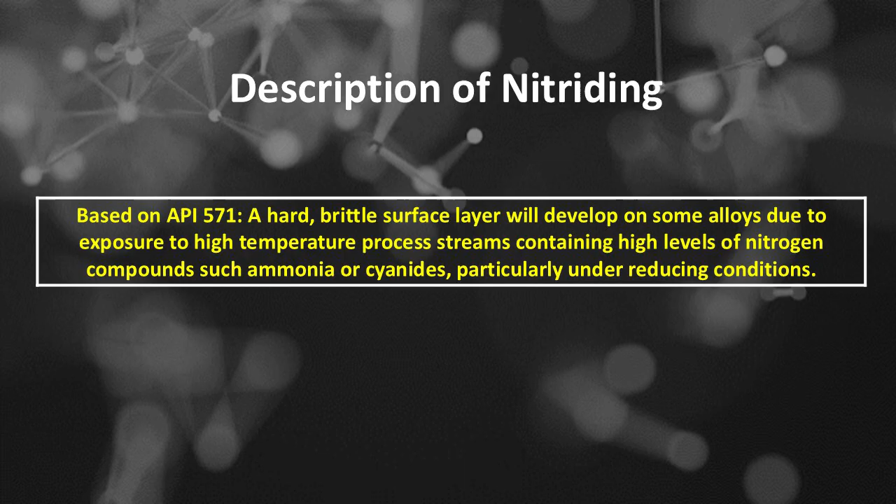Welcome. Today we'll present about nitriding damage mechanisms as part of high-temperature corrosion greater than 400 degrees Fahrenheit or 204 degrees Celsius. Description of nitriding damage mechanisms based on API 571: a hard, brittle surface layer will develop on some alloys due to exposure to high-temperature process streams containing high levels of nitrogen compounds such as ammonia or cyanides, particularly under reducing conditions. Here's a detailed description of nitriding damage.

Introduction: Nitriding is a surface hardening process used to improve the wear resistance, fatigue strength, and corrosion resistance of ferrous metals, particularly steels and alloys. It involves diffusing nitrogen into the surface layer at elevated temperatures to form nitrides, creating a hard, wear-resistant surface. However, despite its benefits, nitriding can sometimes lead to damage if not properly controlled or if adverse conditions occur. Understanding nitriding damage is essential to prevent component failure and ensure optimal performance. Here's a detailed description of nitriding damage.

Number 1 is nature of nitriding process. Process parameters: typically conducted at temperatures between 500 degrees Celsius and 550 degrees Celsius, or 932 degrees Fahrenheit and 1022 degrees Fahrenheit. Material reactions: nitrogen reacts with alloying elements such as chromium, aluminum, molybdenum, and vanadium to form nitrides. Surface characteristics: results in a hard, dense, and often brittle nitride layer on the surface while maintaining a tough core.

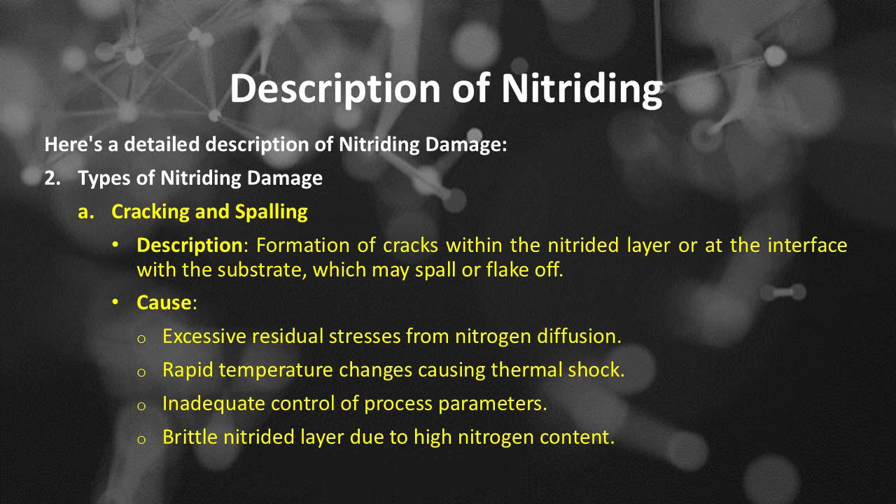Number 2 is types of nitriding damage, includes: A, cracking and spalling, described as formation of cracks within the nitride layer or at the interface with the substrate, which may spall or flake off. Cause of cracking and spalling includes: excessive residual stresses from nitrogen diffusion, rapid temperature changes causing thermal shock, inadequate control of process parameters, and brittle nitride layer due to high nitrogen content.

Types of nitriding damage. Number B, blistering, described as formation of blisters or bubbles on the surface, often accompanied by flaking. Cause of blistering includes: trapped gases or impurities beneath the nitride layer, excessive nitrogen concentration leading to internal stresses, surface contamination or oxide layers interfering with uniform diffusion.

Types of nitriding damage. Number C, porosity and pitting, described as development of pores or pits within the nitride layer. Cause of porosity and pitting includes: improper cleaning or contamination before nitriding, excessive diffusion leading to microvoids, hydrogen entrapment during processing.

Types of nitriding damage. Number D, decarburization and loss of toughness, described as reduction of carbon content near the surface, weakening the material. Cause of decarburization and loss of toughness includes: high-temperature nitriding causing decarburization, overexposure, or prolonged nitriding cycles.

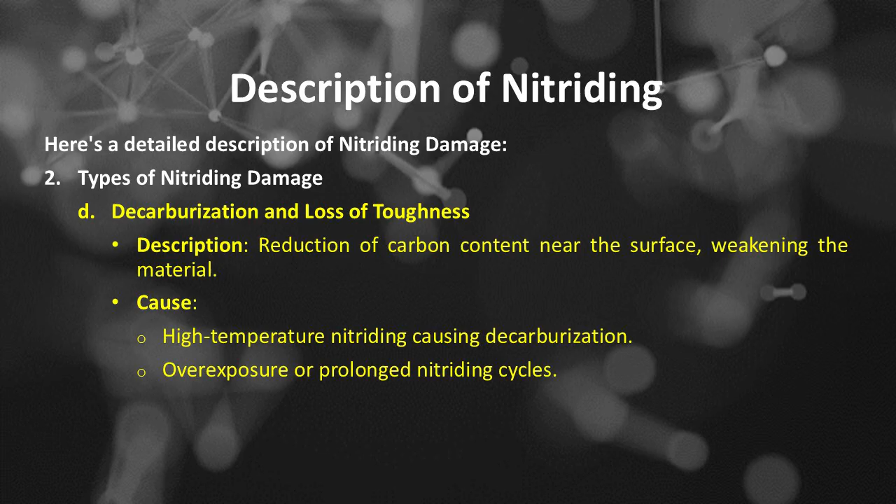Types of nitriding damage. Number E, distortion and dimensional changes, described as warping or dimensional inaccuracies due to differential expansion or contraction. Cause of distortion and dimensional changes includes: uneven heating or cooling, high residual stresses from nitriding.

Number 3 of detailed description of nitriding damage is mechanisms leading to nitriding damage, includes: residual stress accumulation, the nitrogen diffuses into the surface, creating tensile residual stresses that can exceed the material's strength; thermal stresses, rapid heating or cooling induces thermal stresses, causing cracking; chemical incompatibility, inappropriate alloy composition or impurities can lead to uneven nitriding or phase formation; process control failures, deviations in temperature, time, or atmosphere can produce non-uniform layers and damage.

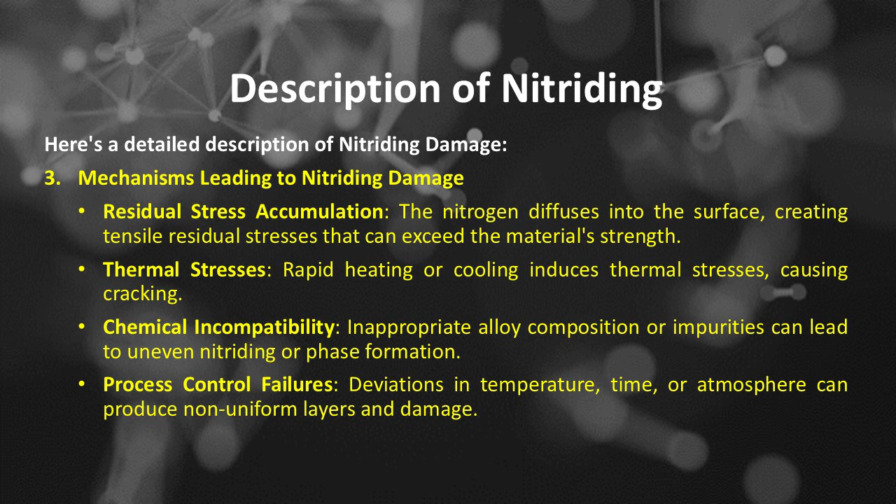Description of nitriding damage. Number 4 is common manifestations and symptoms: cracks visible on the surface or within the nitride layer, flaking or spalling of the nitride surface during operation, surface blisters or bubbles observed visually, increase in surface roughness or pitting, dimensional inaccuracies or warping.

Nitriding damage manifests mainly as cracking, blistering, porosity, and surface spalling caused by residual stresses, thermal shocks, or improper process control. Proper material selection, precise process control, and thorough inspection are essential to prevent and detect nitriding-related failures.

Nitriding damage affected materials based on API 571: Number A, carbon steels, low alloy steels, 300 series SS and 400 series SS. Number B, nickel-base alloys are more resistant.

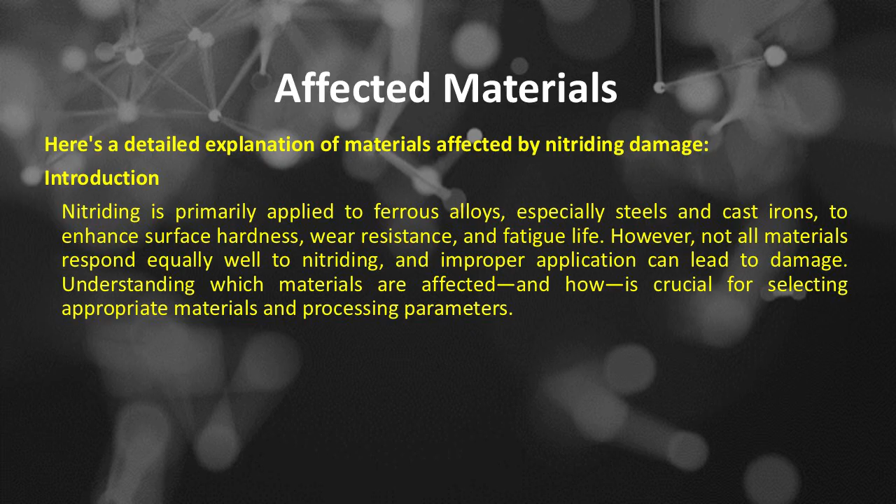Here's a detailed explanation of materials affected by nitriding damage. Nitriding is primarily applied to ferrous alloys, especially steels and cast irons, to enhance surface hardness, wear resistance, and fatigue life. However, not all materials respond equally well to nitriding, and improper application can lead to damage. Understanding which materials are affected, and how, is crucial for selecting appropriate materials and processing parameters. Here's a detailed explanation of the materials affected by nitriding damage.

Number 1 is primary materials susceptible to nitriding damage, includes: A, steels, carbon steels and alloy steels. Commonly nitrided materials include: low to medium carbon steels, such as 1018, 1045; alloy steels, such as 4140, 4340, 9310, and other steels containing alloying elements such as Cr, Mo, V, Ni; hardenable steels, those designed for heat treatment, which often respond well to nitriding.

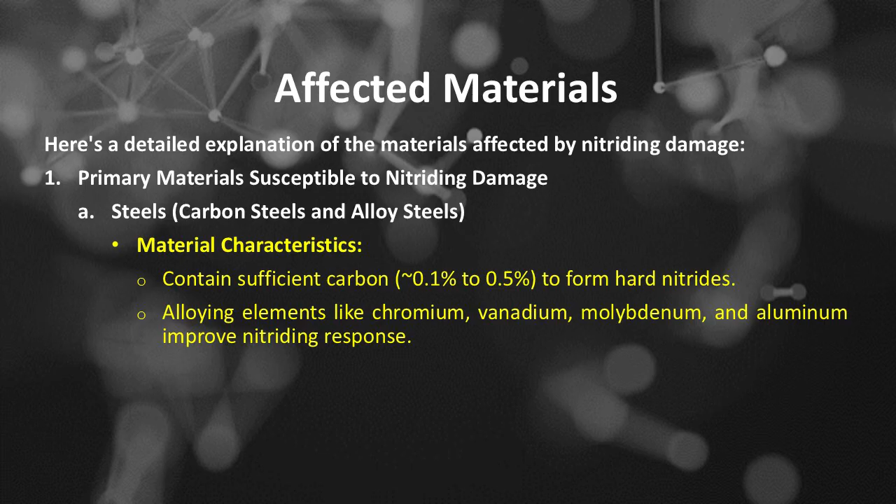Material characteristics include: contain sufficient carbon, approximately 0.1% to 0.5%, required to form hard nitrides; alloying elements like chromium, vanadium, molybdenum, and aluminum improve nitriding response.

Damage susceptibility includes cracking due to residual stresses if process parameters are not optimized, decarburization leading to surface softening, and formation of brittle nitrides if overexposed.

The next primary material susceptible to nitriding damage is cast irons. Types include gray cast iron and ductile or nodular cast iron. They can be nitrided but are more prone to cracking due to their inherent brittleness. Damage includes surface cracking, spalling, or distortion.

Another primary material susceptible to nitriding damage is stainless steels. Common grades include 304, 316, or austenitic stainless steels, and some martensitic stainless steels such as 410, 420.

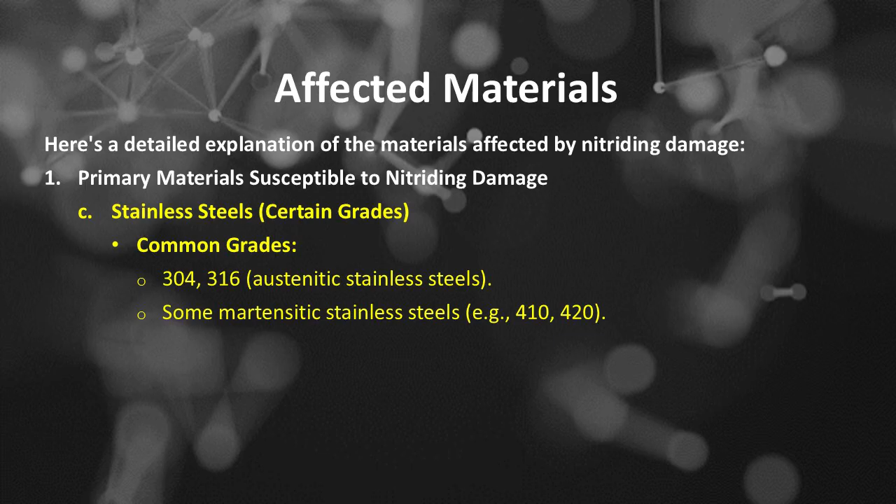Considerations: nitriding of stainless steels is more complex due to their corrosion resistance mechanisms. Damage can occur if nitriding conditions cause phase transformations, such as formation of chromium nitrides that deplete chromium from the matrix, leading to sensitization and corrosion susceptibility.

Number 2 of the materials affected by nitriding damage is materials less suitable or sensitive to nitriding damage. Number A, high carbon steels with excessive carbon. Excess carbon can lead to embrittlement or distortion during nitriding, and overly high carbon content increases risk of cracking.

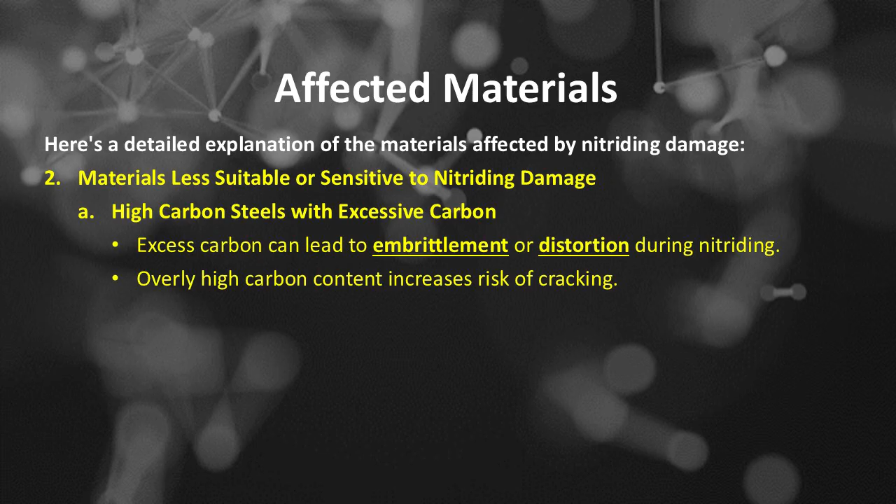Number B, nonmetallic or poorly nitridable materials. Examples include aluminum alloys, titanium, copper and its alloys, and non-ferrous metals. These materials do not form nitrides easily and can be damaged if subjected to high-temperature nitriding atmospheres intended for steels. Number C, certain cast alloys.

Some cast materials with high porosity or impurities are more prone to blistering, porosity, or cracking during nitriding.

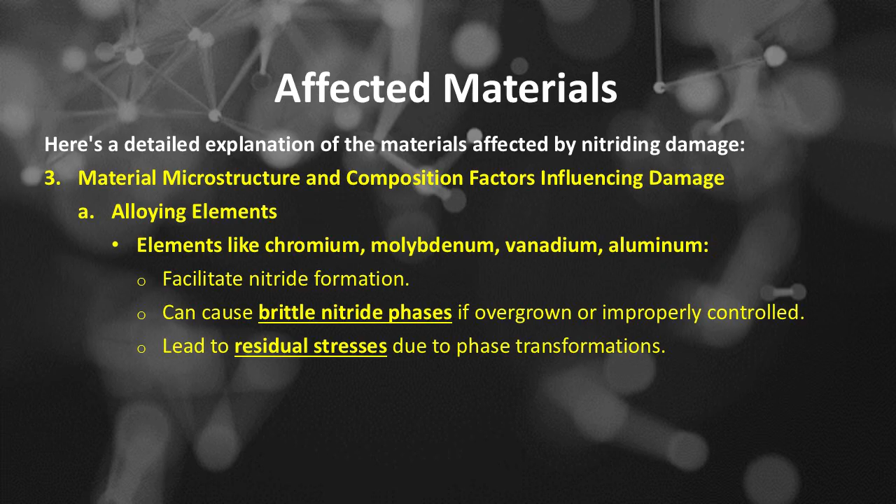Number 3 of the materials affected by nitriding damage is material microstructure and composition factors influencing damage. Number A, alloying elements like chromium, molybdenum, vanadium, and aluminum facilitate nitride formation, can cause brittle nitride phases if overgrown or improperly controlled, and lead to residual stresses due to phase transformations.

Number B, carbon content affects the formation of carbides and nitrides. High carbon can cause decarburization or carbide/nitride segregation leading to embrittlement.

Number C, initial microstructure, including ferritic, martensitic, or bainitic steels, responds differently. Martensitic steels tend to develop high residual stresses and cracks if nitriding is too aggressive. Ferritic steels can nitridize more uniformly but are still susceptible to cracking if process parameters are not optimized.

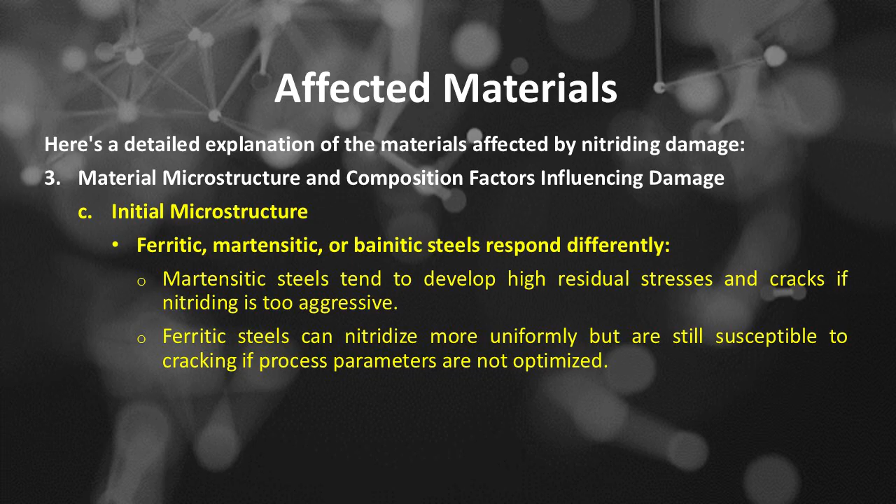Number 4 of the materials affected by nitriding damage is material damage mechanisms related to composition, including residual stresses. Alloys with certain compositions can develop high internal stresses during nitriding, leading to cracking and phase transformation. Certain compositions may undergo unwanted phase changes such as formation of brittle nitrides or carbides, causing embrittlement.

Decarburization: materials with high carbon content can lose carbon from the surface under nitriding conditions, weakening the surface layer.

Number 5 of the materials affected by nitriding damage is special considerations for non-standard materials, including composite materials. Nitriding can cause damage due to differential thermal expansion or phase incompatibilities. For coated materials, protective coatings may be damaged or delaminate during nitriding.

Summary table of the materials affected by nitriding damage. If material type is low to medium carbon steels, then the common issues during nitriding will be cracking, decarburization, distortion, and the susceptibility to damage will be high if process not controlled.

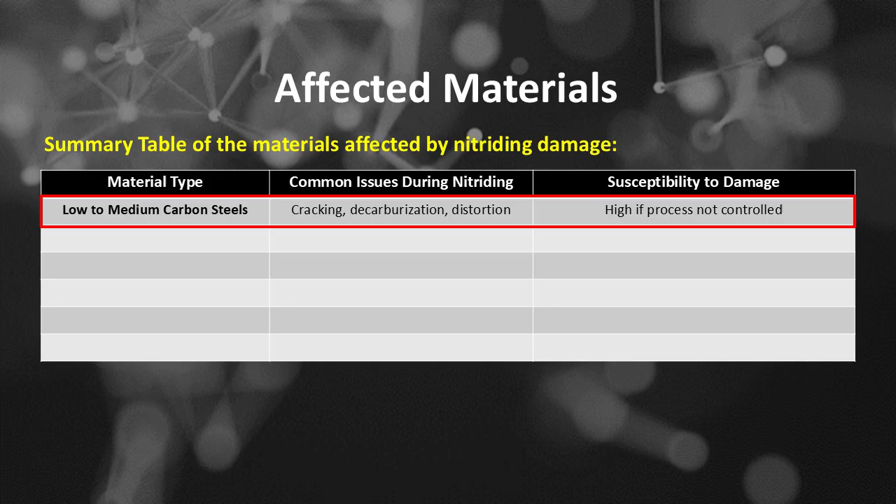If material type is alloy steels, then the common issues during nitriding will be residual stress buildup and brittle phases, and the susceptibility to damage will be medium to high depending on alloy and process.

If material type is cast irons, then the common issues during nitriding will be cracking, spalling, distortion, and the susceptibility to damage will be high due to brittleness.

If material type is stainless steels, then the common issues during nitriding will be phase changes, sensitization, cracking, and the susceptibility to damage will be medium, sensitive to heat treatment conditions.

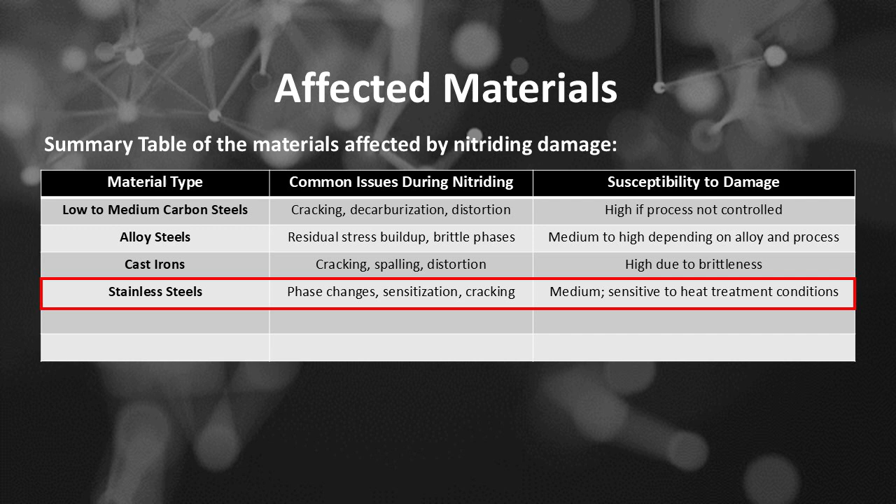If material type is high carbon steels, then the common issues during nitriding will be embrittlement and cracking, and the susceptibility to damage will be high if overexposed.

If material type is non-ferrous metals, then the common issues during nitriding will be no nitriding response, damage unlikely, and the susceptibility to damage will be not applicable.

The susceptibility of materials to nitriding damage depends heavily on their composition, microstructure, and the nitriding process parameters. Proper material selection, process optimization, and pre- and post-treatment procedures are vital to mitigate damage and ensure expected material performance.

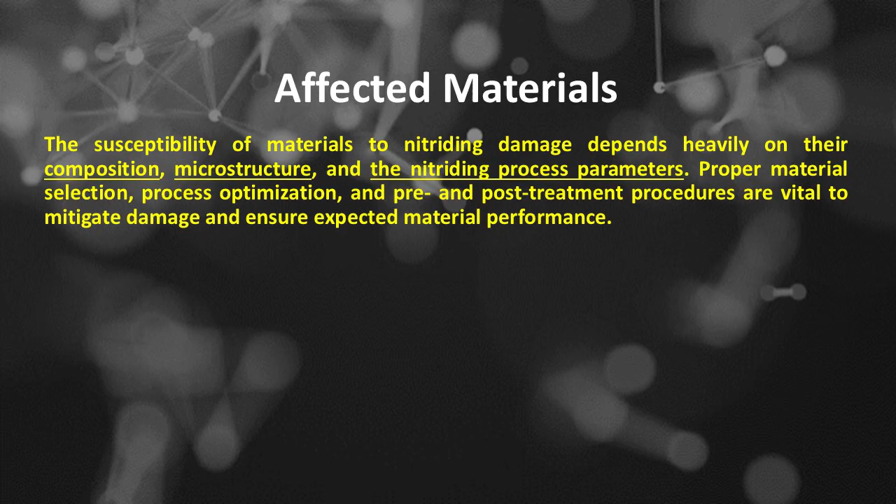Nitriding damage critical factors based on API 571. Number A, nitriding is a diffusion-controlled process dependent on temperature, time, partial pressure of nitrogen, and metal composition.

Number B, temperatures must be high enough to allow for the thermal breakdown or dissociation of nitrogen from ammonia or other compounds and for diffusion of nitrogen into the metal.

Number C, nitriding begins above 600 degrees Fahrenheit or 316 degrees Celsius and becomes severe above 900 degrees Fahrenheit or 482 degrees Celsius. Number D, high gas phase nitrogen activity, or high partial pressures of nitrogen, promotes nitriding.

Corrosion resistance may be adversely affected by nitriding. Alloys containing 30% to 80% nickel are more resistant. A loss of high temperature creep strength, ambient temperature mechanical properties—specifically toughness, ductility—weldability, and corrosion resistance may result.

Here's a comprehensive, detailed explanation of the critical factors of nitriding damage. Introduction: nitriding is a thermochemical surface treatment designed to enhance surface hardness and wear resistance. While beneficial, nitriding can sometimes lead to damage such as cracking, spalling, blistering, or distortion. These adverse outcomes are often the result of key factors that influence the process's success or failure. Understanding these critical factors allows engineers and technicians to optimize nitriding conditions, select appropriate materials, and implement proper pre- and post-treatment procedures to minimize damage.

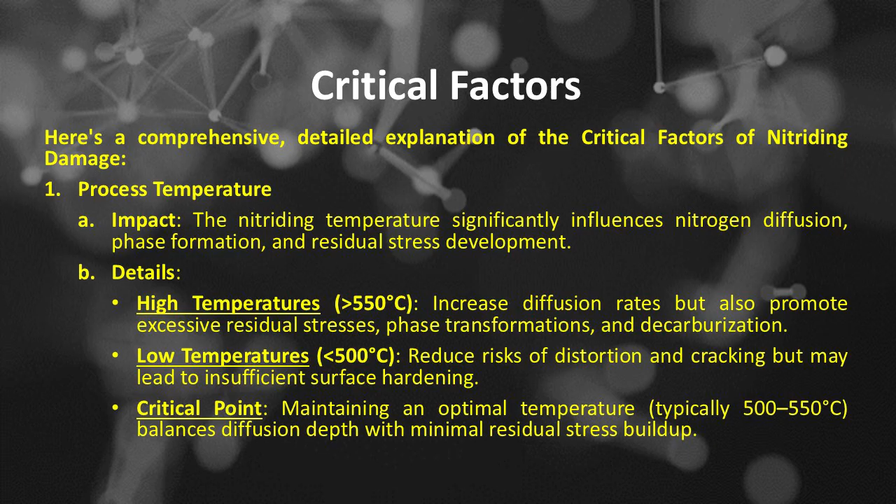Number 2 of the critical factors of nitriding damage is nitriding duration. The impact is the length of the process influences the nitride layer's thickness and the accumulation of residual stresses. Details: overlong nitriding causes excessive nitrogen diffusion, leading to high internal stresses, brittleness, and potential cracking. Insufficient nitriding results in inadequate surface hardening and vulnerability to wear. Critical point: precise control of process duration ensures a balanced nitride layer with minimal damage risk.

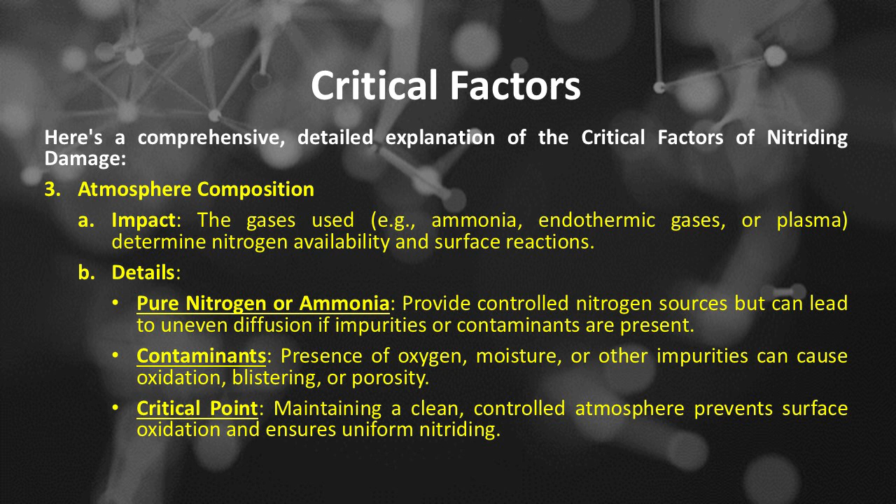Number 3 of the critical factors of nitriding damage is atmosphere composition. The impact is the gases used, such as ammonia, endothermic gases, or plasma, determine nitrogen availability and surface reactions. Details: pure nitrogen or ammonia provide controlled nitrogen sources but can lead to uneven diffusion if impurities or contaminants are present. Contaminants: presence of oxygen, moisture, or other impurities can cause oxidation, blistering, or porosity. Critical point: maintaining a clean, controlled atmosphere prevents surface oxidation and ensures uniform nitriding.

Number 4 of the critical factors of nitriding damage is temperature uniformity. The impact is uneven heating causes thermal gradients that induce thermal stresses. The details include hot spots or cold zones, which lead to differential expansion or contraction, resulting in cracking or distortion. Critical point: uniform temperature distribution within the furnace and on the component surface is essential to prevent localized stresses.

Number 5 of the critical factors of nitriding damage is material composition and microstructure. The impact is the alloy's chemical makeup and initial microstructure influence its response to nitriding. Details: alloying elements like Cr, V, Mo, Al enhance nitriding but can also promote brittle phase formation if not controlled. Carbon content: excessive carbon can lead to decarburization or carbide precipitation, causing embrittlement. Microstructure: martensitic, ferritic, or bainitic structures respond differently. Martensitic steels are more prone to cracking under residual stresses. Critical point: selecting suitable alloys and microstructures minimizes damage potential.

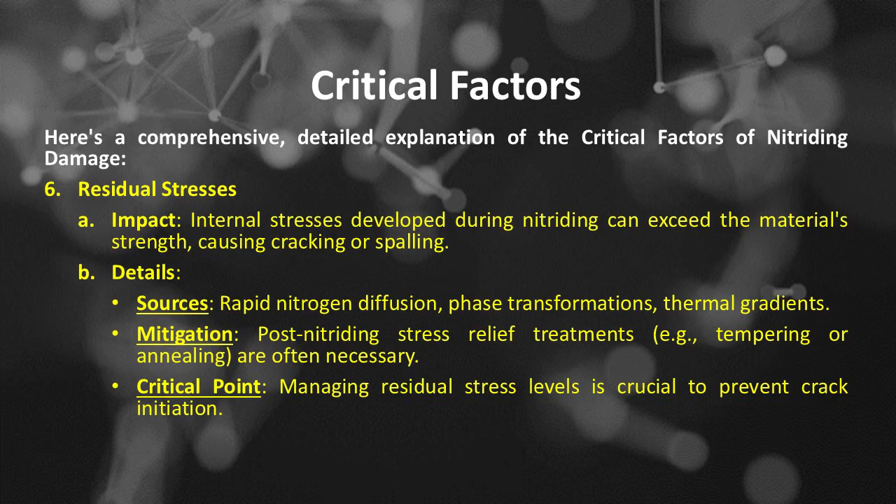Number 6 of the critical factors of nitriding damage is residual stresses. The impact is internal stresses developed during nitriding can exceed the material's strength, causing cracking or spalling. Details: sources include rapid nitrogen diffusion, phase transformations, and thermal gradients. Mitigation: post-nitriding stress relief treatments, such as tempering or annealing, are often necessary. Critical point: managing residual stress levels is crucial to prevent crack initiation.

Number 7 of the critical factors of nitriding damage is surface preparation. The impact is surface cleanliness and roughness influence nitriding uniformity and defect formation. Details: contaminants like oil, dirt, oxides, or scale can cause blistering, porosity, or uneven diffusion. Surface finish: rough surfaces may trap gases or impurities, leading to blistering or pitting. Critical point: proper cleaning, degreasing, and surface finish improve process outcomes.

Number 8 of the critical factors of nitriding damage is cooling rate and thermal shock. The impact is rapid cooling can induce thermal stresses, leading to cracking. Details: rapid cooling causes differential contraction, especially in thick or complex parts. Gradual cooling helps to relax residual stresses and prevent damage. Critical point: controlled, gradual cooling reduces thermal shock risks.

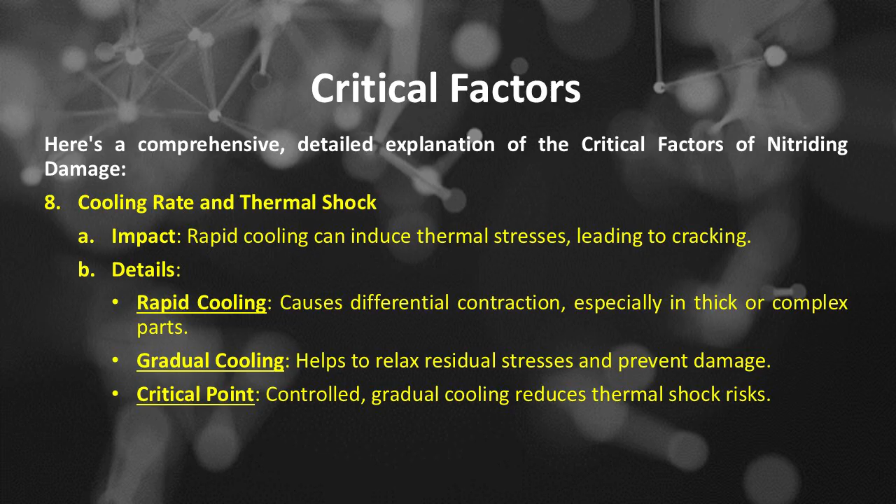Number 9 of the critical factors of nitriding damage is component design and geometry. The impact is sharp corners, thin sections, or complex geometries concentrate stresses. Details: stress concentrators like sharp edges or abrupt cross-sectional changes increase risk of cracking. Design considerations: incorporate fillets, uniform thickness, and stress relief features. Critical point: proper component design minimizes stress concentrations during nitriding.

Number 10 of the critical factors of nitriding damage is post-treatment processes. The impact is post-nitriding heat treatments can relieve residual stresses and reduce damage. Details: stress relief annealing reduces internal stresses that could cause cracking.

Renitriding is sometimes necessary if initial nitriding causes microstructural issues. The critical point is that appropriate post-treatment ensures the component's integrity and performance.

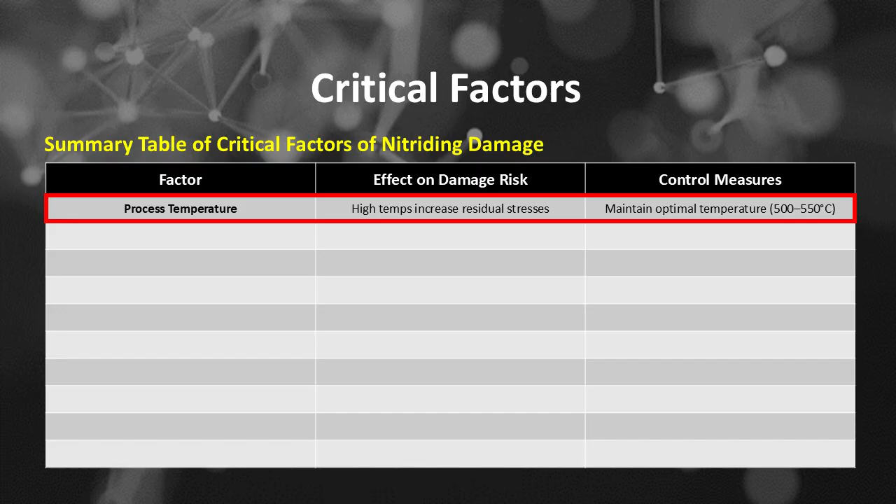Summary table of critical factors of nitriding damage. If the critical factor is process temperature, the effect on damage risk is that high temperatures increase residual stresses. Control measures should maintain optimal temperature between 500 and 550 degrees Celsius.

If the critical factor is nitriding duration, excessive time causes brittleness; control measures require precise timing control. If the critical factor is atmosphere composition, impurities cause blistering; control measures should use clean, controlled atmospheres.

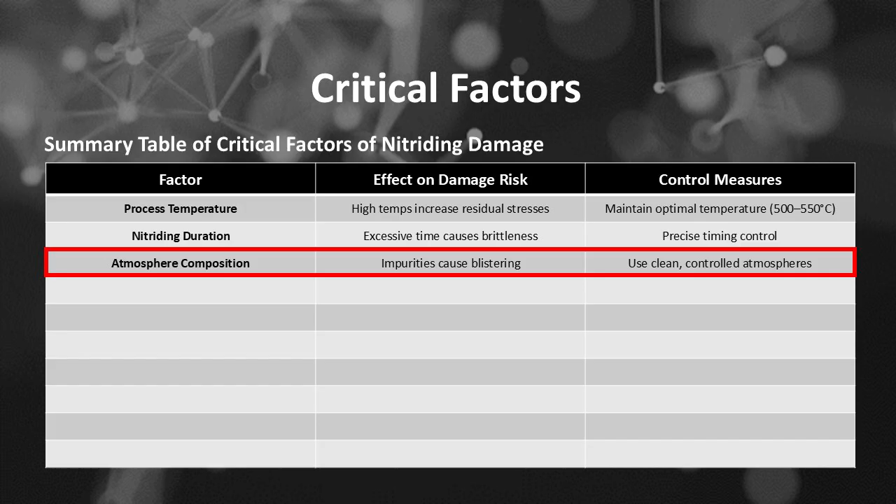If the critical factor is temperature uniformity, uneven heating causes stresses; control measures should ensure uniform furnace heating. If the critical factor is material microstructure, inappropriate microstructure leads to cracking; control measures should select suitable alloys and microstructures.

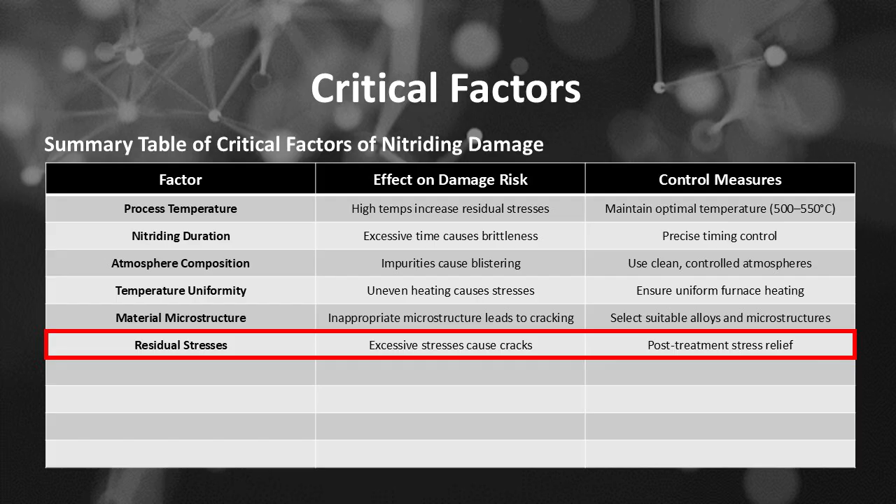If the critical factor is residual stresses, excessive stresses cause cracks; control measures should include post-treatment stress relief. If the critical factor is surface preparation, contaminants induce defects; control measures should clean thoroughly before nitriding.

If the critical factor is cooling rate, rapid cooling causes thermal shock; control measures should cool gradually and uniformly. If the critical factor is component design, sharp corners increase stress; control measures should design with stress relief features.

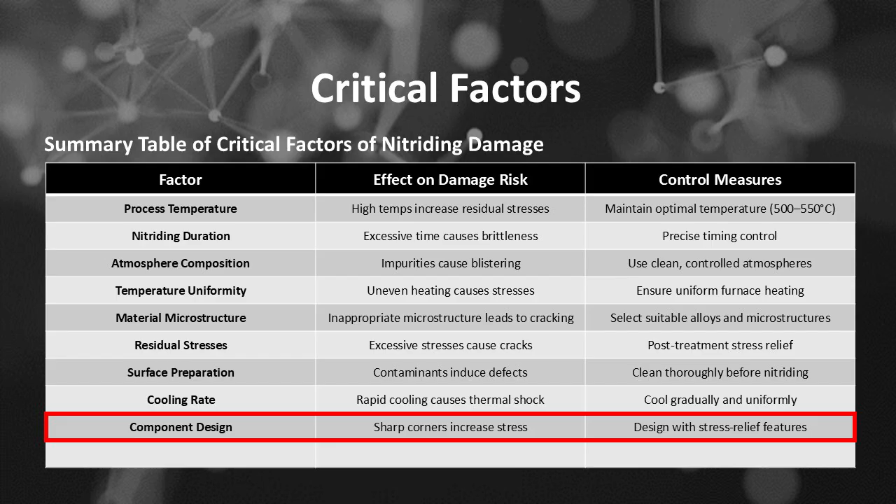If the critical factor is post-treatment processes, insufficient stress relief is a risk; control measures should implement proper post-heat treatments.

Mitigating nitriding damage requires a holistic approach, carefully managing all these critical factors. Proper process control, material selection, component design, and post-treatment are essential for achieving the desired surface properties while avoiding damage.

Nitriding damage affected units or equipment based on API 571. Nitriding can occur at any location where appropriate environment and temperature conditions are met, but it is considered fairly rare. Nitriding has been observed in steam methane reformers, steam gas cracking, olefin plants, and ammonia synthesis plants.

Here's a detailed explanation of the affected units or equipment of nitriding damage. Introduction: nitriding is a high-temperature surface treatment process that involves specialized equipment such as furnaces, gas generators, and auxiliary systems.

Damage during nitriding not only affects the workpieces but can also significantly impact the equipment used, leading to operational downtime, increased maintenance costs, and safety hazards. Understanding which units or equipment are susceptible to damage during nitriding helps in planning, maintenance, and process control. Here's a detailed explanation of the affected units or equipment of nitriding damage.

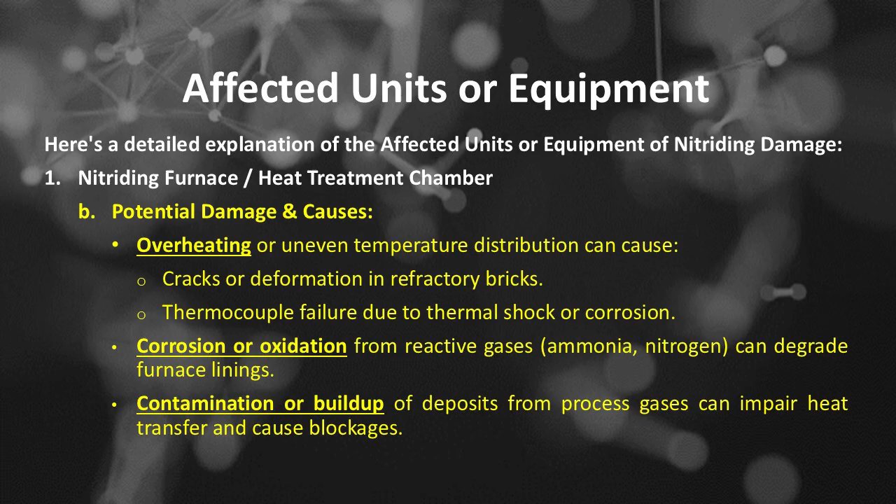The impact on the nitriding furnace or heat treatment chamber is that furnace damage leads to operational downtime, costly repairs, and the need for replacement of critical components.

Number 2, gas supply and control systems. The key components affected are gas regulators, valves, burners, and flow controllers. Potential damage and causes include corrosion or erosion from reactive gases like ammonia, blockages or leaks caused by deposits or improper maintenance, and pressure surges or fluctuations damaging control equipment. The impact of gas supply and control systems is disruption of the nitriding atmosphere, leading to inconsistent or defective treatments.

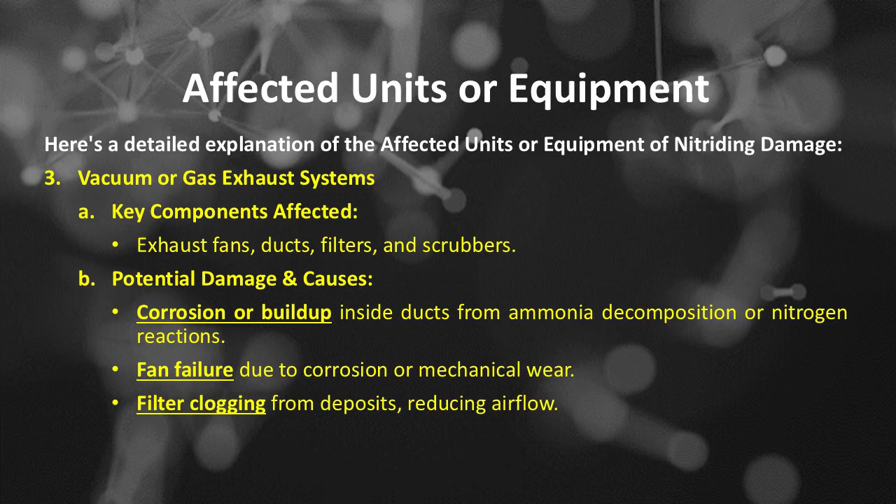Number 3 of the affected units or equipment of nitriding damage is vacuum or gas exhaust systems. The key components affected include exhaust fans, ducts, filters, and scrubbers. Potential damage and causes include corrosion or buildup inside ducts from ammonia decomposition or nitrogen reactions, fan failure due to corrosion or mechanical wear, and filter clogging from deposits, reducing airflow. The impact of vacuum or gas exhaust systems is that poor exhaust management can cause safety hazards, environmental issues, or process failures.

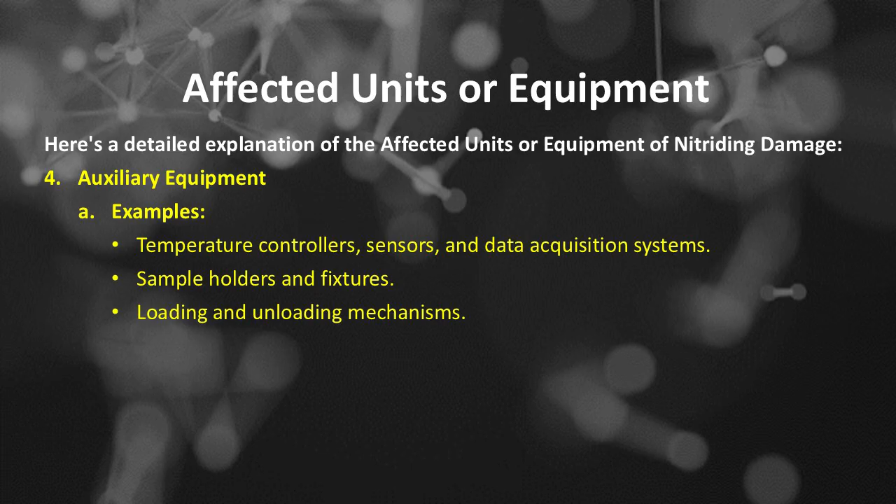Number 4 of the affected units or equipment of nitriding damage is auxiliary equipment, such as temperature controllers, sensors, data acquisition systems, sample holders and fixtures, and loading and unloading mechanisms. Potential damage and causes include sensor drift or failure from high temperatures or reactive gases, mechanical wear or deformation of fixtures under thermal stress, and contamination or corrosion affecting equipment longevity.

Number 5 of the affected units or equipment of nitriding damage is post-treatment equipment, if applicable. For examples, cooling chambers, stress relief ovens, or tempering furnaces. Potential damage and causes of post-treatment equipment includes thermal fatigue or distortion due to rapid cooling, equipment corrosion from residual gases or moisture.

Number 6 of the affected units or equipment of nitriding damage is handling and transportation equipment. For examples, carts, racks, or fixtures used to load or unload parts. Potential damage and causes includes corrosion or degradation from exposure to nitriding atmospheres, mechanical wear from repeated handling under high temperatures.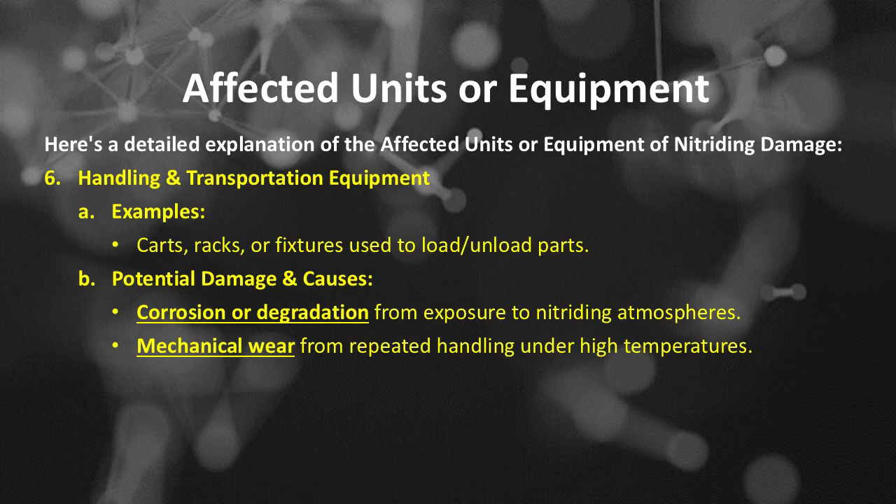Number 7 of the affected units or equipment of nitriding damage is environmental control systems. For examples, ventilation, fume extraction, and safety systems. Potential damage and causes: fume buildup due to leaks or system failures, corrosion of ventilation ducts from reactive gases.

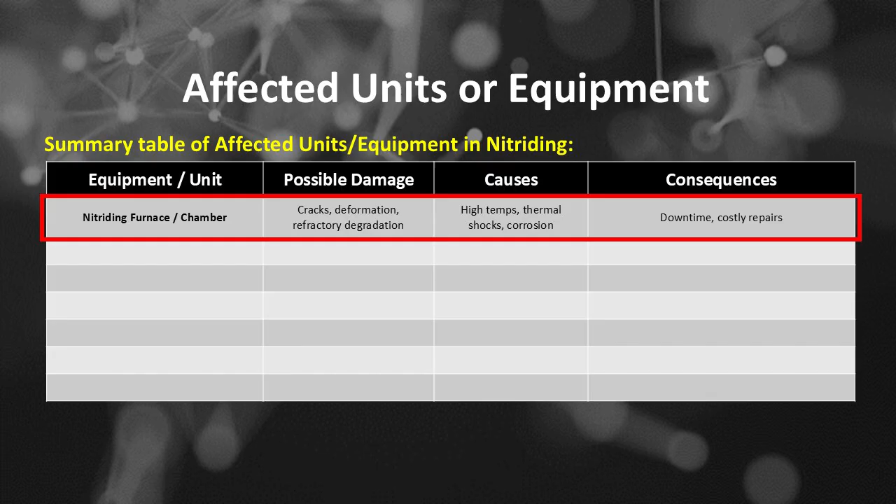Summary table of affected units or equipment in nitriding. For equipment or unit is nitriding furnace or chamber, the possible damage will be cracks, deformation, refractory degradation. They will cause as high temps, thermal shocks, corrosion, and the consequences would be downtime, costly repairs.

For equipment or unit is gas supply and control systems, the possible damage will be leaks, corrosion, regulator failure. They will cause as reactive gases, contamination, and the consequences would be process inconsistency, safety hazards.

For equipment or unit is exhaust and ventilation systems, the possible damage will be corrosion, clogging, fan failure. They will cause as gas reactions, deposits, and the consequences would be environmental and safety issues.

For equipment or unit is auxiliary equipment, sensors, fixtures. The possible damage will be sensor failure, deformation. They will cause as thermal stress, corrosion, and the consequences would be inaccurate control, equipment failure.

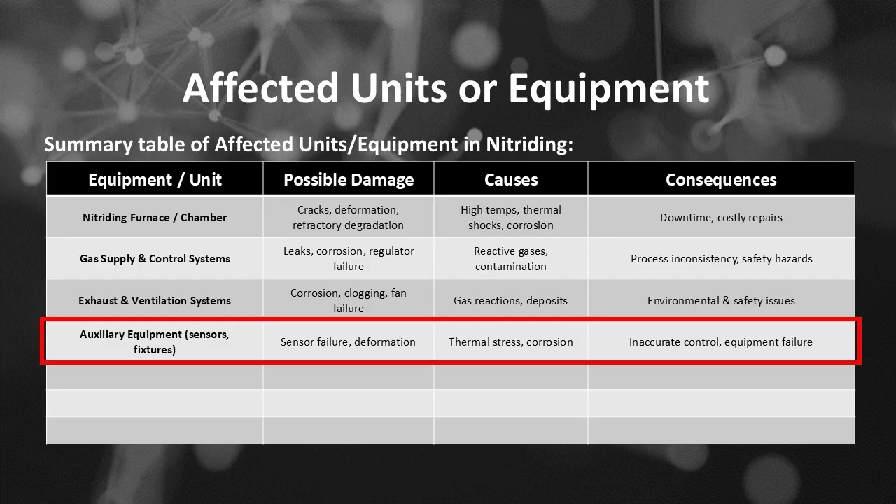For equipment or unit is post-treatment equipment, the possible damage will be thermal fatigue, corrosion. They will cause as rapid cooling, residual gases, and the consequences would be reduced lifespan, safety risks.

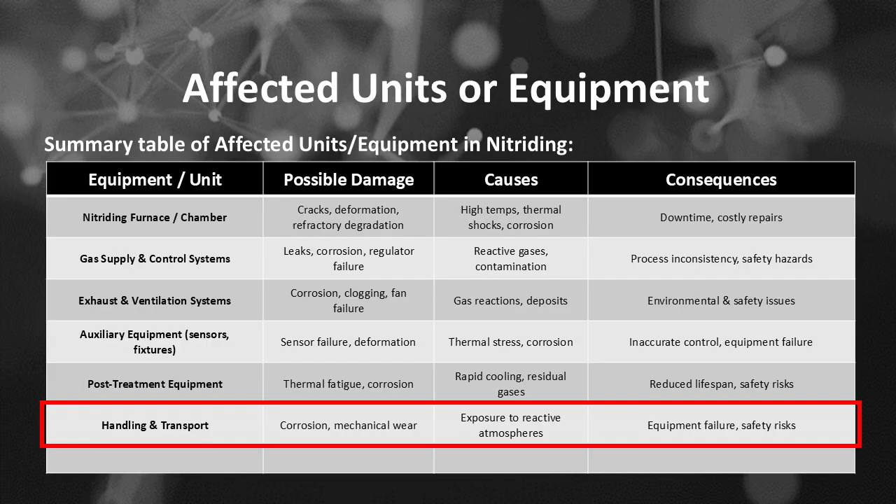For equipment or unit is handling and transport, the possible damage will be corrosion, mechanical wear. They will cause as exposure to reactive atmospheres, and the consequences would be equipment failure, safety risks.

For equipment or unit is environmental control systems, the possible damage will be leaks, corrosion, fume buildup. They will cause as system failure, improper maintenance, and the consequences would be safety hazards, environmental pollution.

Damage to equipment during nitriding can have serious operational, safety, and financial implications. Proper maintenance, material selection, and process control are vital to mitigate equipment damage. Regular inspections, corrosion protection, and adherence to safety standards help ensure equipment longevity and process reliability.

Appearance or morphology of nitriding damage based on API 571. Number A, nitriding is usually confined to the surface of most components and will have a dull, dark gray appearance. However, during initial stages of nitriding, damage can only be seen with metallography as shown in Figure 4-130, Figure 4-131 and Figure 4-132.

See Figure 4-130, a nitrided 5Cr 0.5 Mo thermowell from an ammonia synthesis plant with surface cracking. See Figure 4-131, a photomicrograph of a cross-section through the tube showing the interface between the shallow nitride layer on the surface, gray, and the unaffected base metal, white. Cracks initiate from the OD surface at the top.

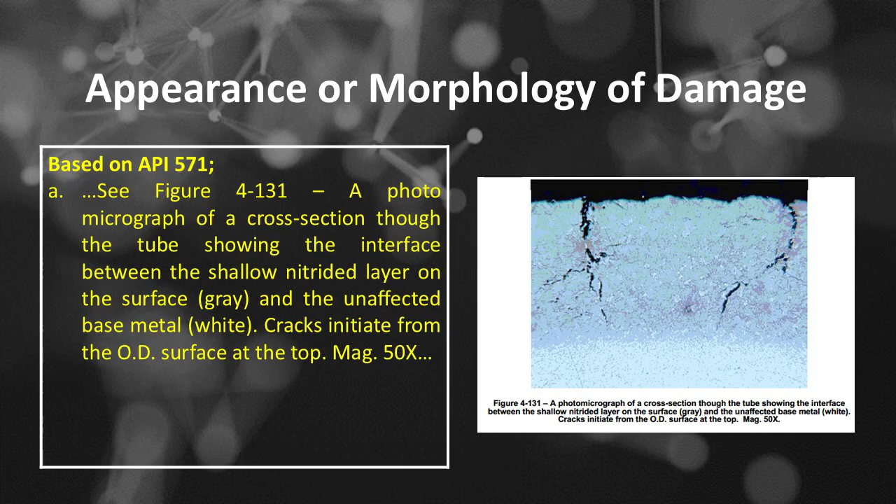Mag. 50x. See Figure 4-132, a higher magnification photomicrograph showing the diamond-shaped hardness indentations in the hard nitride layer, 540 Bhn, versus the softer base metal, 210 Bhn. Mag. 150x. Number B, in a more advanced stage, the material will exhibit very high surface hardness.

In most cases, a slightly harder surface layer of a vessel or component will not affect the mechanical integrity of the equipment. However, the concern is for the potential development of cracks in the nitride layer that could propagate into the base metal.

Number C, nitriding of low alloy steels containing up to 12% chromium is accompanied by an increase in volume. The nitride layer tends to crack and flake.

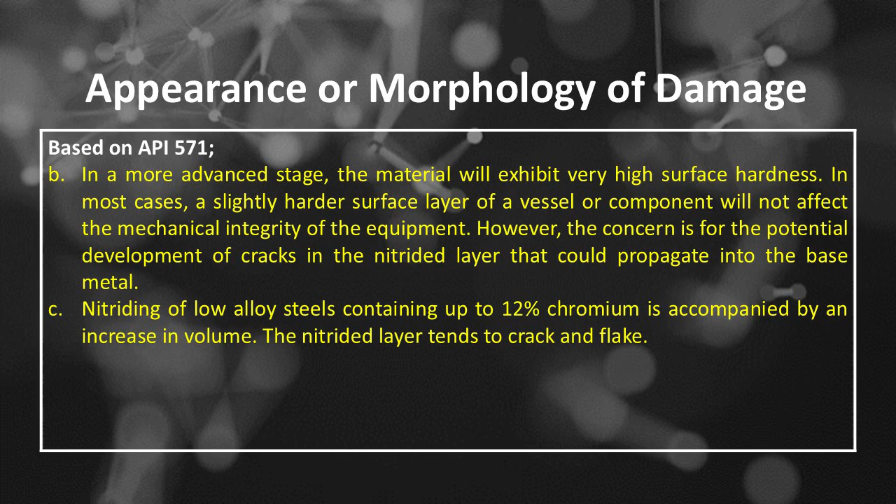Number D, above 750 degrees Fahrenheit, or 400 degrees Celsius, preferential grain boundary nitriding may lead to microcracking and embrittlement. Number E, stainless steels tend to form thin, brittle layers that may crack and spall from thermal cycling or applied stress.

Number F, nitrogen diffuses into the surface and forms needle-like particles of iron nitrides, Fe3N or Fe4N, that can only be confirmed by metallography.

Here's a detailed explanation of the appearance or morphology of nitriding damage. Introduction. The visual and microstructural appearance of nitriding damage provides critical clues about the underlying causes and severity of the issues encountered during or after the nitriding process. Recognizing specific damage morphologies helps in diagnosing process faults, selecting appropriate mitigation strategies, and improving future treatments.

Number 1 of the appearance or morphology of nitriding damage is cracking patterns.

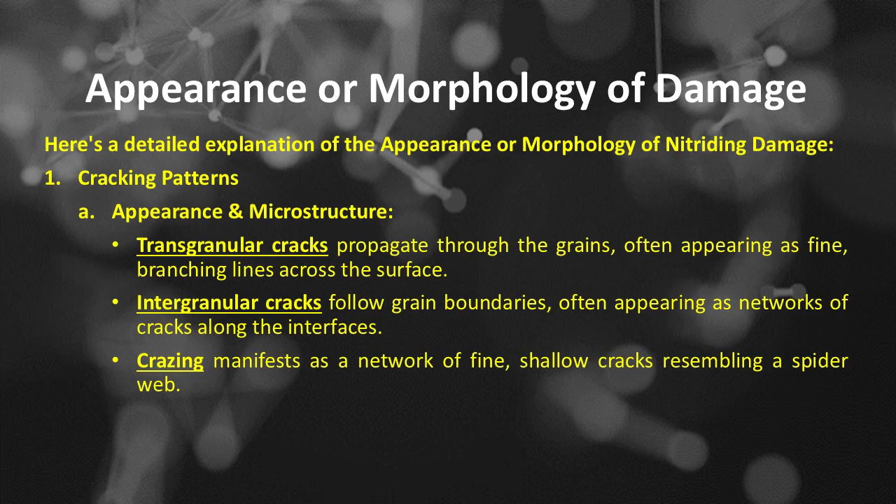The appearance and microstructure includes transgranular cracks that propagate through the grains, often appearing as fine, branching lines across the surface. Intergranular cracks follow grain boundaries, often appearing as networks of cracks along the interfaces. Crazing manifests as a network of fine, shallow cracks resembling a spider web. Cracking patterns, causes, and morphology result from residual stresses exceeding the material's fracture toughness, often initiated at surface defects, inclusions, or stress concentrators. Cracks may be visible as sharp lines or rough, jagged features on the surface.

Number 2 of the appearance or morphology of nitriding damage is blistering and bloating. The appearance is rounded, blister-like protrusions on the surface. Blisters may vary in size from micrometers to millimeters. The surface around blisters may appear shiny or rough.

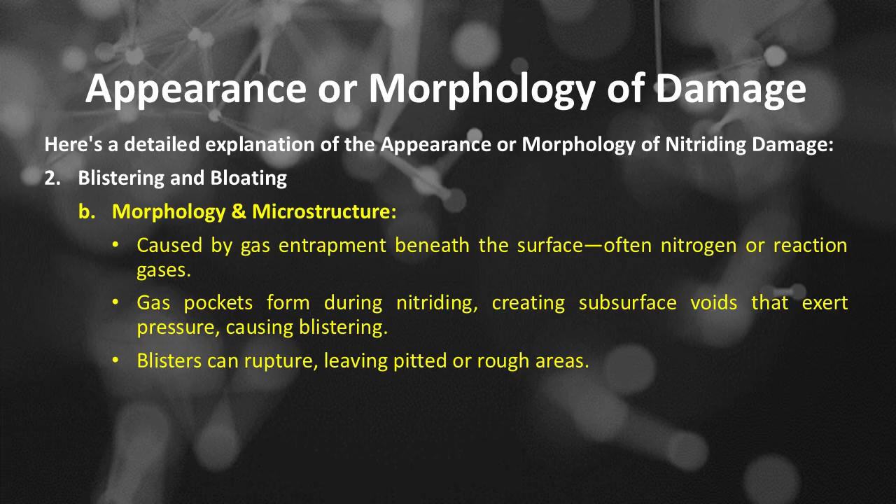Blistering and bloating morphology and microstructure are caused by gas entrapment beneath the surface, often nitrogen or reaction gases. Gas pockets form during nitriding, creating subsurface voids that exert pressure, causing blistering. Blisters can rupture, leaving pitted or rough areas. Visual clues include smooth, dome-shaped elevations, and possible peeling or flaking if blisters rupture.

Number 3 of the appearance or morphology of nitriding damage is spalling and flaking. The appearance would be flakes or chips of material detaching from the surface, usually associated with severe cracking or blistering. Spalling and flaking morphology and microstructure: failure of the nitrided layer or substrate due to high residual stresses or brittle phases. Spalled regions often show rough, uneven edges.

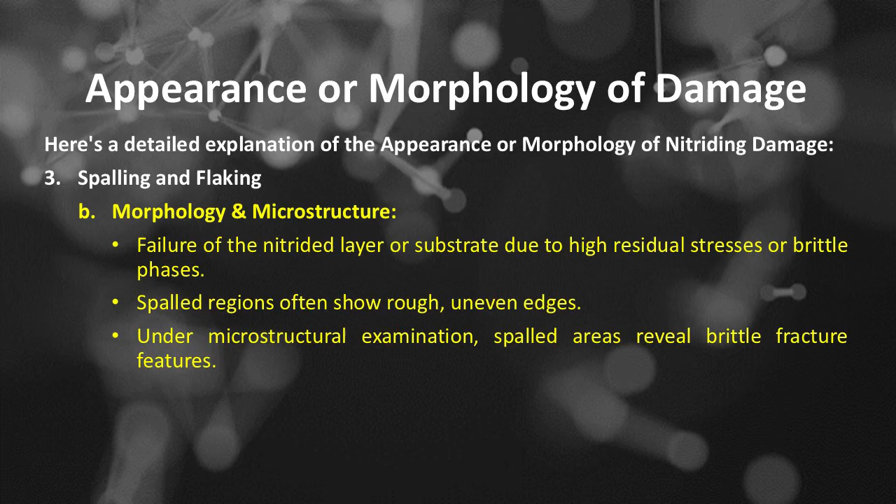Number 4 of the appearance or morphology of nitriding damage is porosity and pitting. The appearance would be small, round or irregular voids on or beneath the surface. Pits may be shallow or deep, with rough or smooth contours.

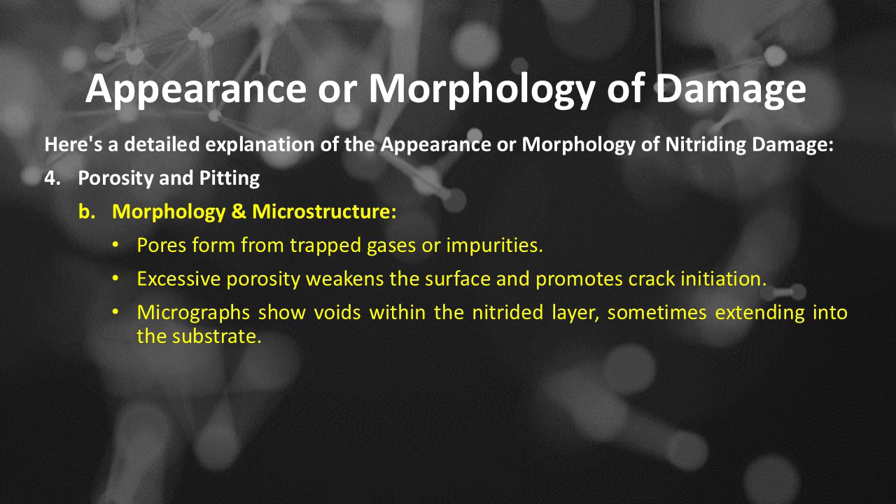Porosity and pitting morphology and microstructure: pores form from trapped gases or impurities. Excessive porosity weakens the surface and promotes crack initiation. Micrographs show voids within the nitrided layer, sometimes extending into the substrate. Visual clues: surface irregularities with a crater-like appearance, may be associated with blistering or flaking.

Number 5 of the appearance or morphology of nitriding damage is decarburization and microstructural changes. The appearance would be surface may appear dull, softer, or with different coloration. Microstructural examination reveals changes such as carbide dissolution or formation of brittle phases. Morphology of decarburization and microstructural changes: loss of carbides leads to a loss of hardness and brittleness. Micrographs show a deoxidized or softened layer with altered grain structure.

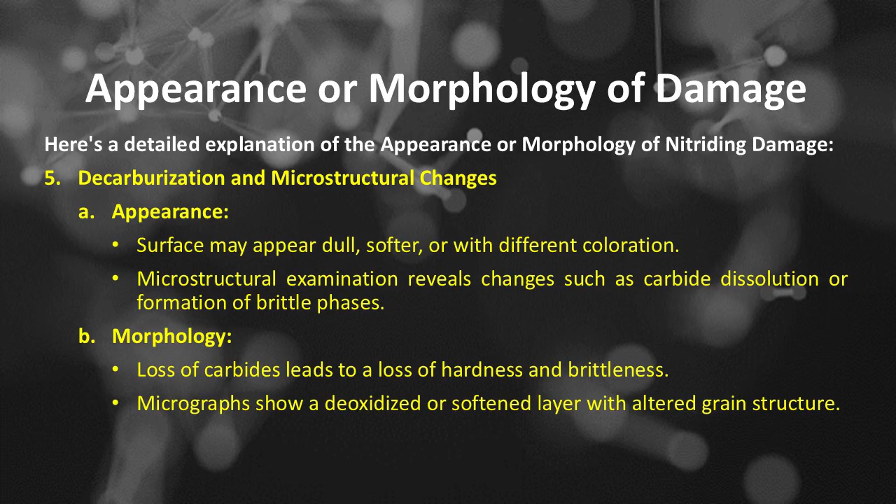Decarburization and microstructural changes visual clues: changes in surface finish or color, and microstructural features such as enlarged grains or carbide depletion zones.

Number 6 of the appearance or morphology of nitriding damage is distortion and warping. The appearance would be bending, twisting, or uneven warping of components. Surface or edges may appear uneven or deformed. Morphology and microstructure result from thermal stresses and residual stress buildup. Microstructural evidence includes microcracks or uneven phase distribution. Visual clues: deformed geometry, surface irregularities, cracks, or distortions.

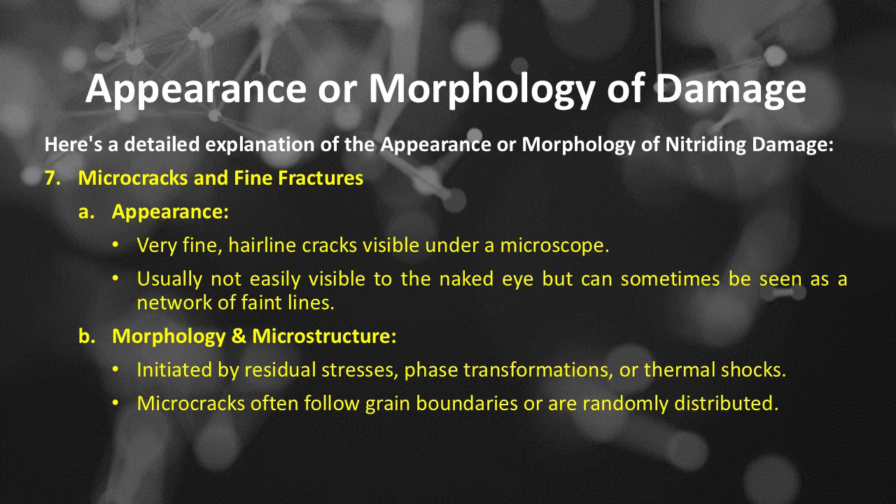Number 7 of the appearance or morphology of nitriding damage is microcracks and fine fractures. The appearance would be very fine, hairline cracks visible under a microscope, usually not easily visible to the naked eye but can sometimes be seen as a network of faint lines. Morphology and microstructure of microcracks and fine fractures are initiated by residual stresses, phase transformations, or thermal shocks. Microcracks often follow grain boundaries or are randomly distributed. Visual clues: detected via microscopic examination rather than macro inspection.

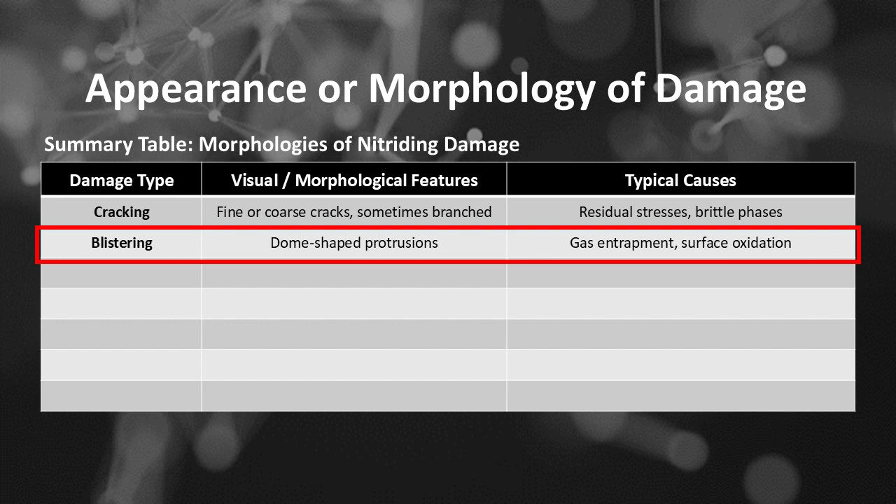Summary table of morphologies of nitriding damage. For damage type cracking, the visual or morphological features will be fine or coarse cracks, sometimes branched, and the typical causes will be residual stresses, brittle phases. For damage type blistering, the visual or morphological features will be dome-shaped protrusions, and the typical causes will be gas entrapment, surface oxidation.

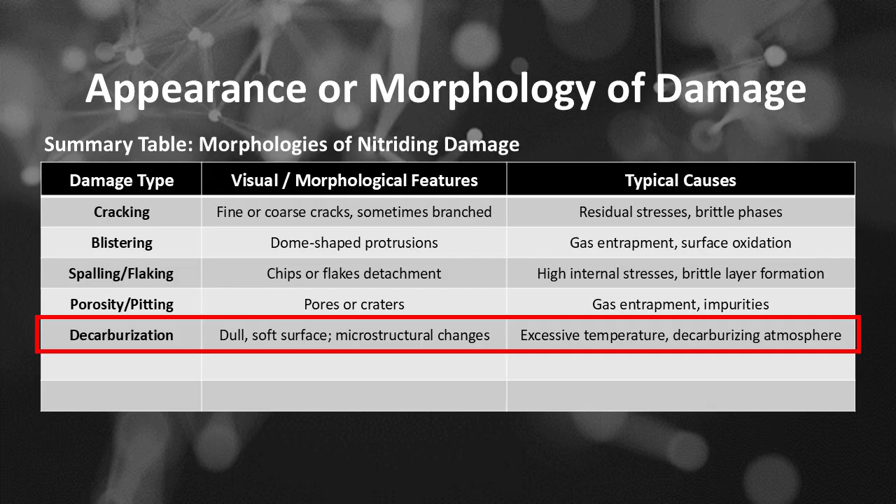For damage type spalling or flaking, the visual or morphological features will be chips or flakes detachment, and the typical causes will be high internal stresses, brittle layer formation. For damage type porosity and pitting, the visual or morphological features will be pores or craters, and the typical causes will be gas entrapment, impurities. For damage type decarburization, the visual or morphological features will be dull, soft surface, microstructural changes, and the typical causes will be excessive temperature, decarburizing atmosphere.

For damage type distortion, the visual or morphological features will be warped or bent parts, and the typical causes will be thermal stresses, uneven cooling. For damage type microcracks, the visual or morphological features will be fine network of cracks, and the typical causes will be residual stresses, phase transformation stresses.

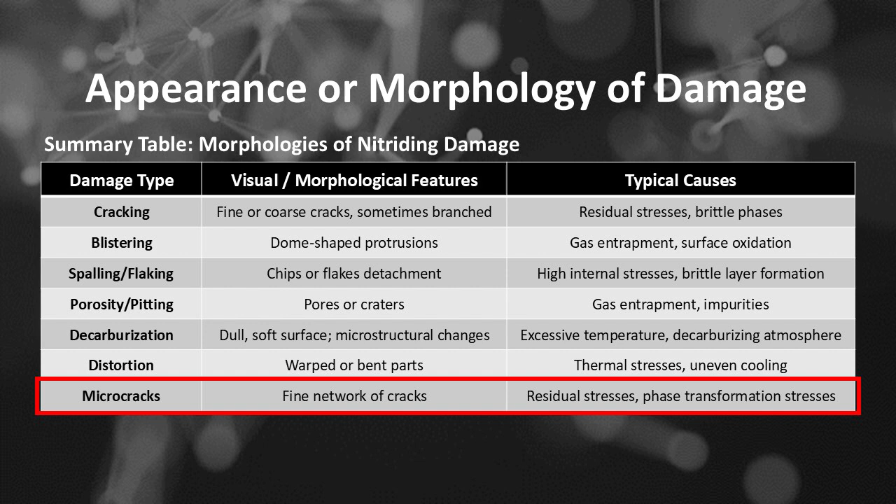The appearance and morphology of nitriding damage provide essential diagnostic clues. Recognizing these features allows for understanding the underlying causes, whether process-related, material-related, or equipment-related, and implementing appropriate corrective measures.

Nitriding damage prevention and mitigation based on API 571: changing to more resistant alloys with 30% to 80% nickel is usually required. It is usually not practical to modify the process conditions to reduce the nitrogen partial pressure or to lower temperatures. Here's a comprehensive, detailed explanation of prevention and mitigation strategies for nitriding damage.

Introduction. Nitriding is a valuable surface hardening process, but it can be prone to various forms of damage such as cracking, blistering, porosity, and distortion. Preventing these issues requires a combination of proper process control, material selection, equipment maintenance, and post-treatment procedures.

Number 1 of prevention and mitigation strategies for nitriding damage is material selection and preparation. The key principles include: use materials with suitable composition and microstructure for nitriding, ensure high purity and cleanliness to reduce inclusions and impurities, and pre-treat materials to relieve residual stresses.

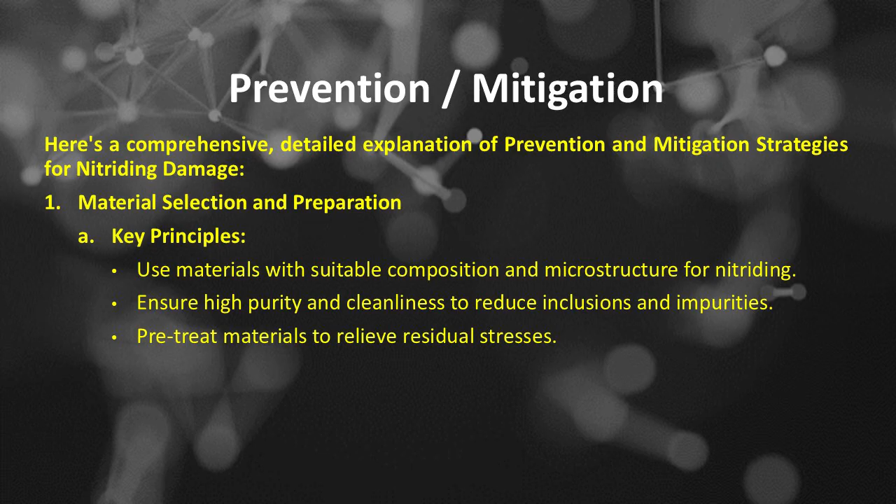Detailed actions in the material selection and preparation activities include choosing appropriate steels or alloys, steels with controlled nitrogen affinity and stable microstructures, such as low-carbon steels. Nitriding steels like 17CrNiMo6 are less prone to damage.

Avoid materials with high residual stresses. Stress relieved or normalized prior to nitriding minimizes internal stresses that can cause cracking. Clean surfaces thoroughly, removing grease, oxide layers, and scale via grit blasting, degreasing, or acid pickling to prevent contamination that can lead to porosity or uneven nitriding.

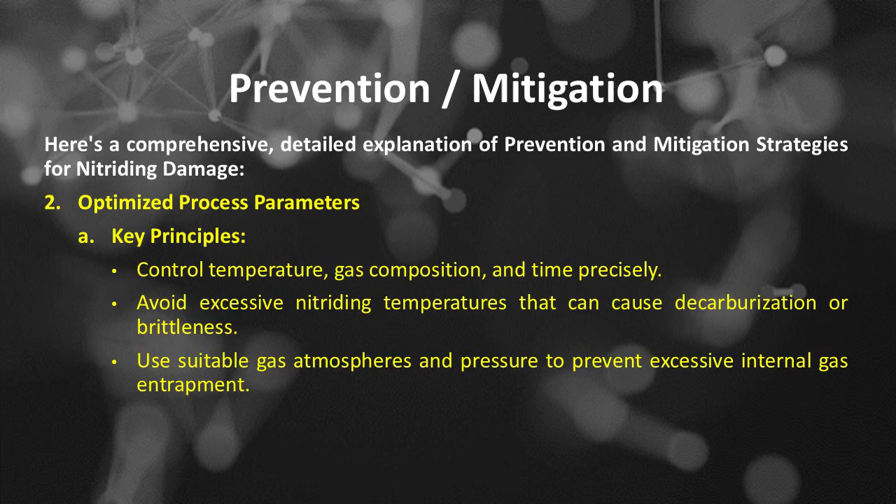Number 2 of prevention and mitigation strategies for nitriding damage is optimized process parameters. The key principles include: control temperature, gas composition, and time precisely; avoid excessive nitriding temperatures that can cause decarburization or brittleness; and use suitable gas atmospheres and pressure to prevent excessive internal gas entrapment.

Detailed actions in optimized process parameters activities include temperature control: keep nitriding temperatures within the recommended range, typically 500 to 550 degrees Celsius. Avoid rapid temperature changes to prevent thermal shock.

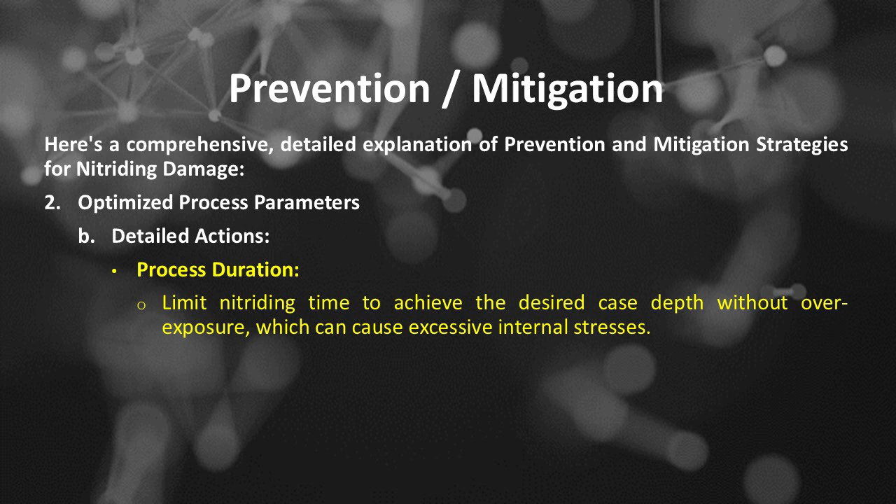The next is to optimize gas composition: use a controlled ammonia or nitrogen atmosphere to minimize gas decomposition and internal gas entrapment. Incorporate proper gas flow rates to ensure uniform atmosphere and prevent localized overheating. The next is to optimize process duration: limit nitriding time to achieve the desired case depth without overexposure, which can cause excessive internal stresses.

Number 3 of prevention and mitigation strategies for nitriding damage is pre- and post-treatment mechanical processes. The key principles include reducing residual stresses before nitriding and relieving stresses after nitriding if necessary. Detailed actions in pre-treatment: stress relieving or normalization reduces internal stresses; surface finishing, such as polishing or shot peening, can improve surface integrity and residual stress distribution.

Detailed actions in post-treatment: low-temperature tempering or stress relief annealing can reduce residual stresses induced during nitriding. Controlled cooling minimizes thermal shocks and distortion.

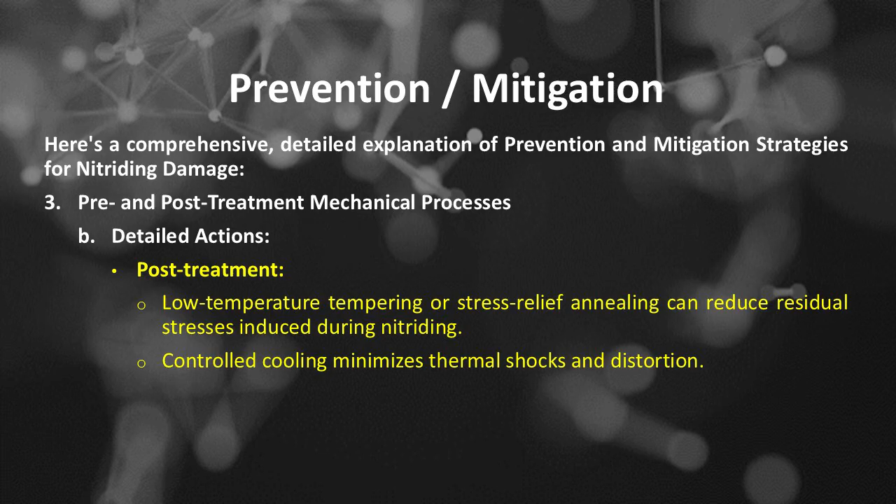Number 4 of prevention and mitigation strategies for nitriding damage is equipment maintenance and process control. The key principles include maintaining equipment to ensure uniform temperature and gas flow, and regularly inspecting and calibrating process controls. Detailed actions in furnace maintenance: check refractory lining integrity to prevent uneven heating, and maintain uniform heating elements.

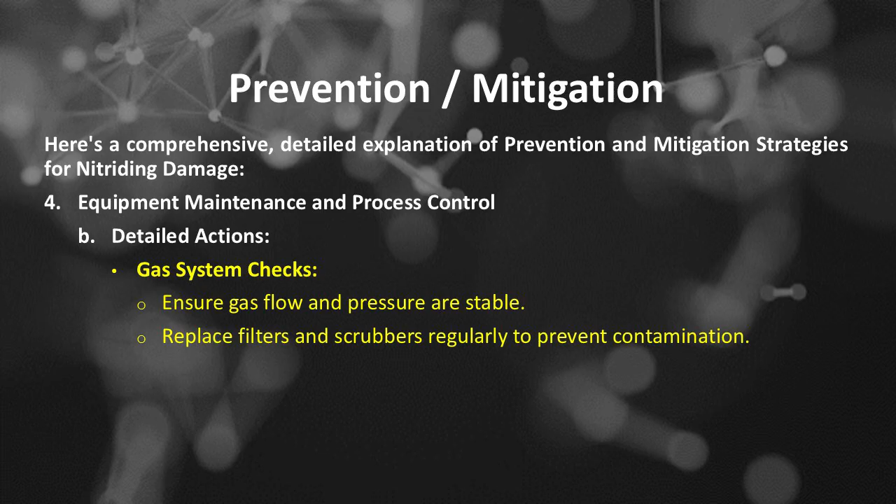Detailed actions in gas system checks: ensure gas flow and pressure are stable, and replace filters and scrubbers regularly to prevent contamination. Detailed actions in monitoring and control: use accurate thermocouples and sensors, and implement real-time process monitoring to detect deviations early.

Number 5 of prevention and mitigation strategies for nitriding damage is controlling cooling and heating rates. The key principle is to avoid rapid temperature changes to prevent thermal stresses. Detailed actions include: first, gradual heating and cooling—ramp temperatures slowly during heating and cooling phases.

Use controlled cooling environments to prevent thermal shocks. The second is cooling media: use inert or controlled atmospheres during cooling to prevent oxidation or decarburization.

Number 6 of prevention and mitigation strategies for nitriding damage is use of protective coatings and surface treatments. The key principles include protecting surfaces from oxidation and contamination, and enhancing surface integrity to reduce stress concentrations.

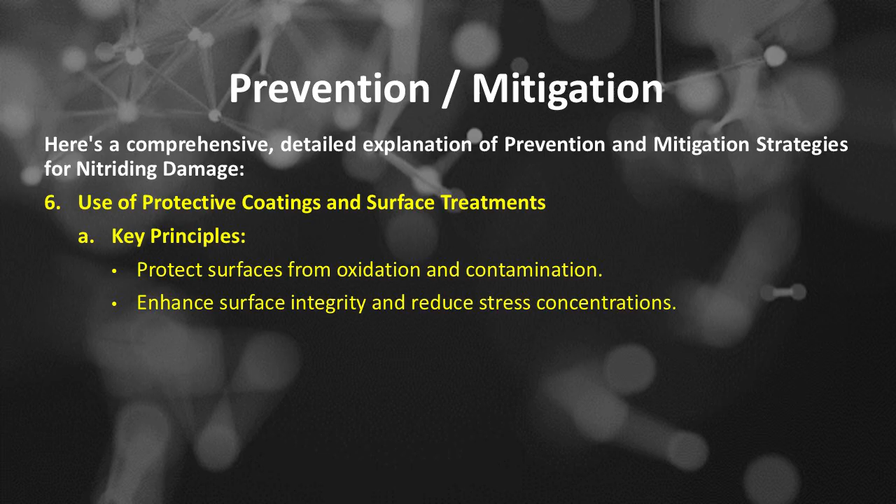Detailed actions in use of protective coatings and surface treatments include applying coatings, such as boron nitride or ceramic coatings, to prevent oxidation and improve process uniformity. Surface peening, such as shot peening or laser peening, introduces compressive residual stresses, reducing crack initiation.

Number 7 of prevention and mitigation strategies for nitriding damage is process inspection and quality control. The key principles include detecting early signs of damage or process deviations, and using non-destructive testing or NDT to assess surface and microstructural integrity.

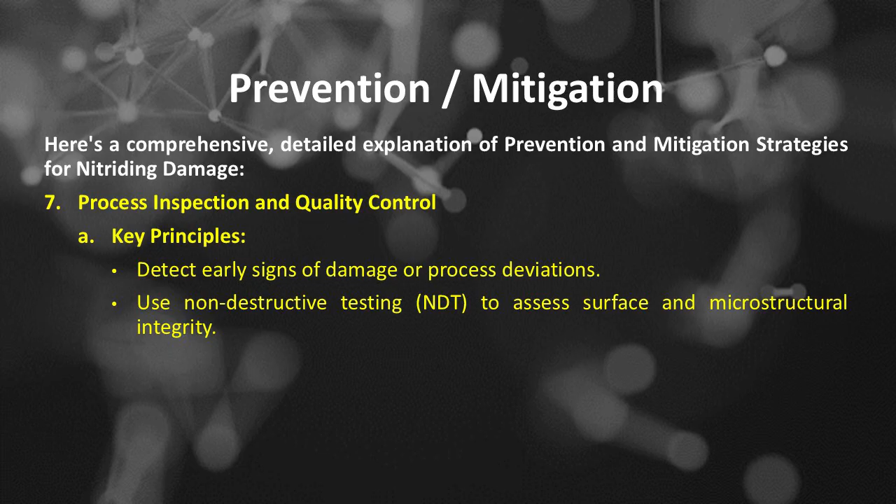Detailed actions in process inspection and quality control include: visual inspection, looking for blistering, cracking, or surface irregularities; microstructural analysis, using metallography to detect porosity, decarburization, or brittle phases; hardness testing, ensuring case hardness meets specifications without excessive brittleness; and residual stress measurement, using X-ray diffraction or other methods to assess internal stresses.

Number 8 of prevention and mitigation strategies for nitriding damage is post-nitriding treatments and repairs. The key principles include correcting or relieving pre-existing damage and enhancing surface properties and longevity.

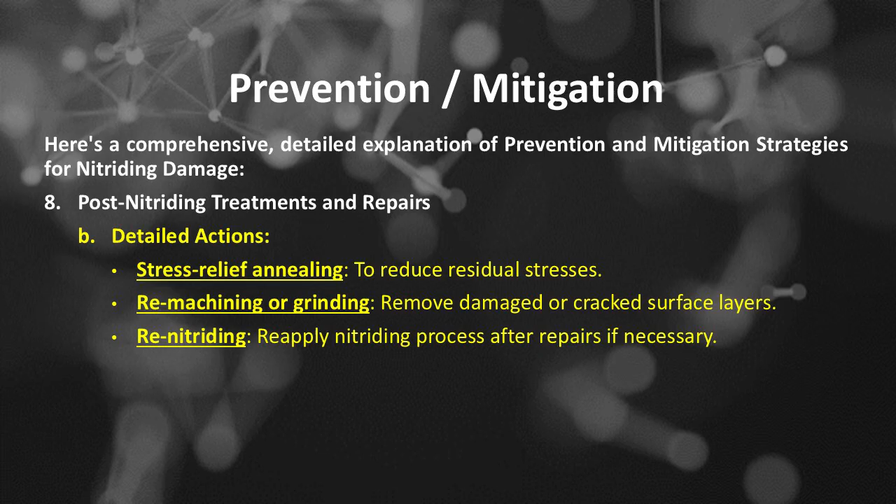Detailed actions in post-nitriding treatments and repairs include stress relief annealing to reduce residual stresses, remachining or grinding to remove damaged or cracked surface layers, and renitriding, which means reapplying the nitriding process after repairs if necessary.

Summary table of prevention and mitigation strategies for nitriding damage. For strategy in use, material selection and preparation: key actions to be taken are using suitable alloys and clean surfaces. The expected outcome for this strategy is reduced internal stresses and fewer defects.

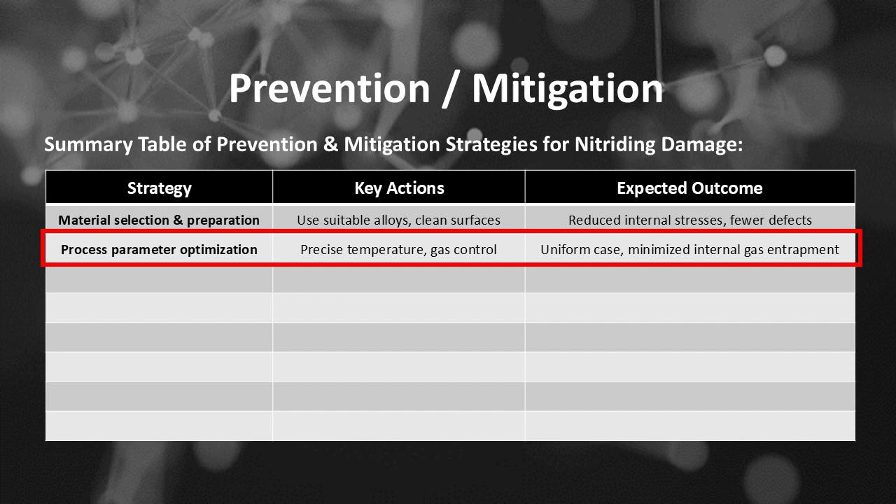For strategy in use, process parameter optimization: key actions to be taken are precise temperature and gas control. The expected outcome for this strategy is uniform case and minimized internal gas entrapment.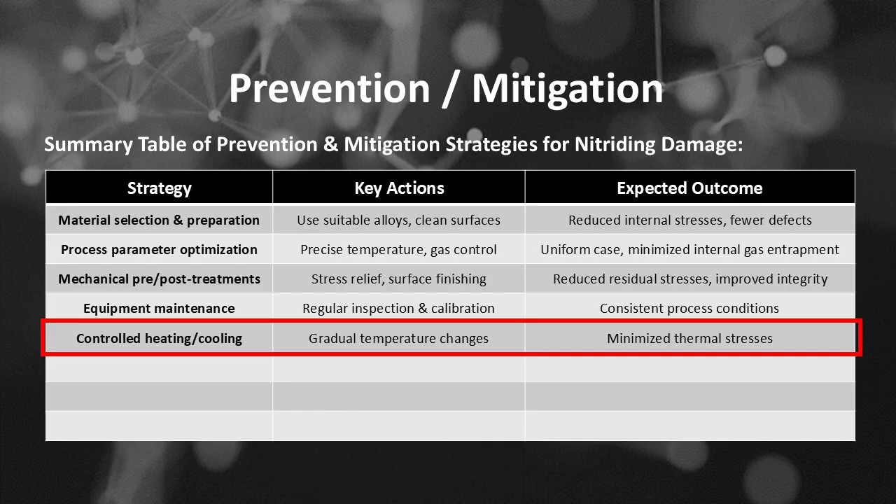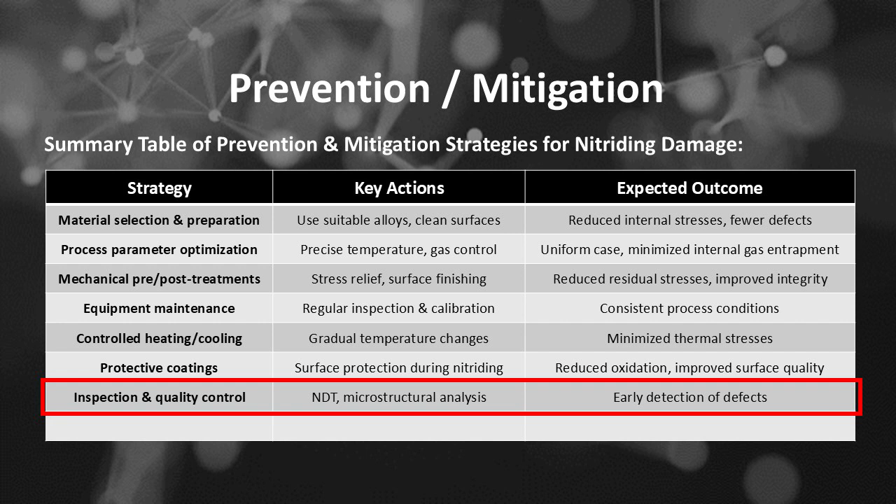For strategy in use, inspection and quality control: key actions to be taken are NDT and microstructural analysis. The expected outcome for this strategy is early detection of defects.

For strategy in use, post-treatment repairs: key actions to be taken are stress relief and remachining. The expected outcome for this strategy is damage mitigation and extended component life.

Preventing nitriding damage involves a comprehensive approach that integrates material science, process engineering, equipment maintenance, and quality control. Proper planning and adherence to optimized process parameters significantly reduce the risk of damage, ensuring durable, high-quality nitrided components.

Nitriding damage inspection and monitoring based on API 571: A, a change in surface color to a dull gray may indicate nitriding. B, materials exposed to nitriding conditions should be inspected thoroughly because good appearance may mask damage. C, hardness testing of the affected surfaces, 400 to 500 BHN or higher, can help indicate nitriding.

D, nitride layers are magnetic. Therefore, 300 series stainless steel should be checked for magnetism as an initial screening. E, metallography is generally required to confirm nitriding.

F, EC testing may be used in some cases to detect nitriding. G, in the advanced stages of nitriding, where cracking may have initiated, appropriate inspection techniques include PT, RT, and UT. Here's a detailed overview of inspection and monitoring methods used to detect nitriding damage.

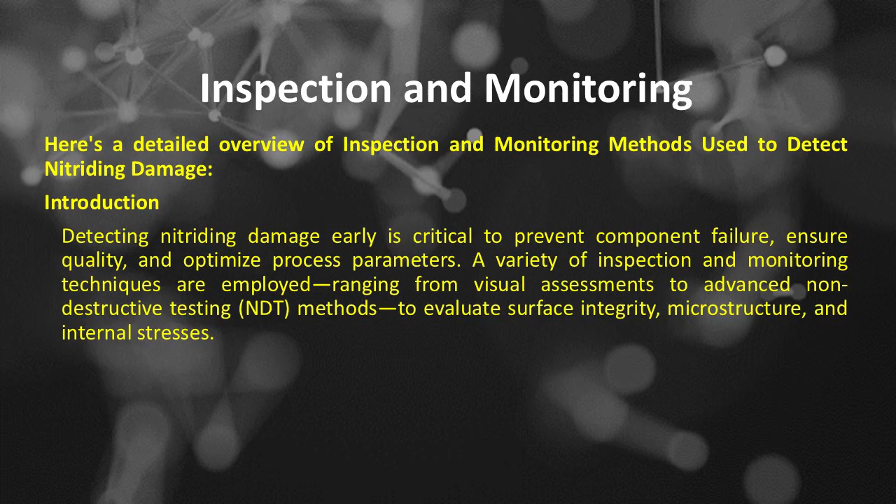Number 1 of inspection and monitoring methods for nitriding damage is visual inspection. The purpose of visual inspection is rapid, initial assessment for surface defects such as blistering, cracking, spalling, or discoloration. Visual inspection methods include use of magnifying lenses or microscopes for detailed surface examination, and inspection under good lighting conditions, sometimes with UV or infrared light for specific defects.

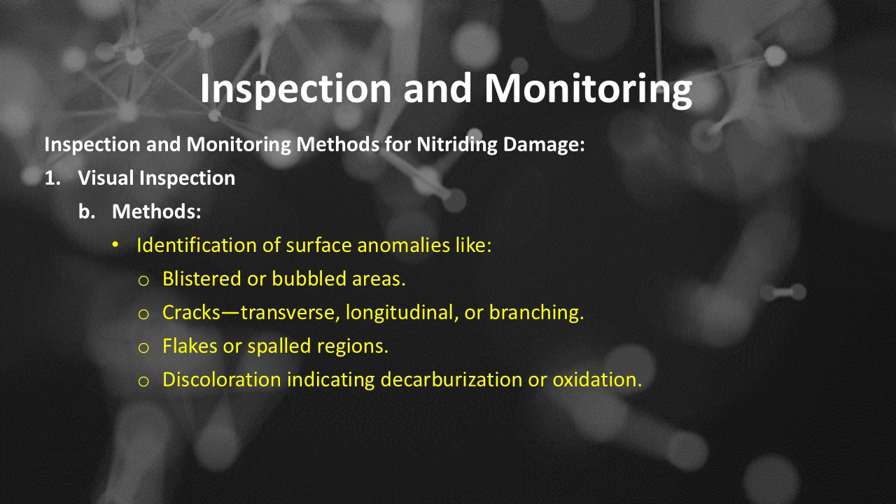Visual inspection methods are used to identify surface anomalies like blistered or bubbled areas, cracks - transverse, longitudinal, or branching - flakes or spalled regions, and discoloration indicating decarburization or oxidation. Visual inspection limitations: it cannot detect subsurface or microstructural damage, and it is subjective, depending on inspector experience.

Number 2 of inspection and monitoring methods for nitriding damage is microscopic and microstructural examination. A, optical microscopy: its purpose is to observe surface microcracks, porosity, or phase changes. The method involves preparing metallographic samples, polishing and etching, to detect microcracks, grain boundary issues, or brittle phases.

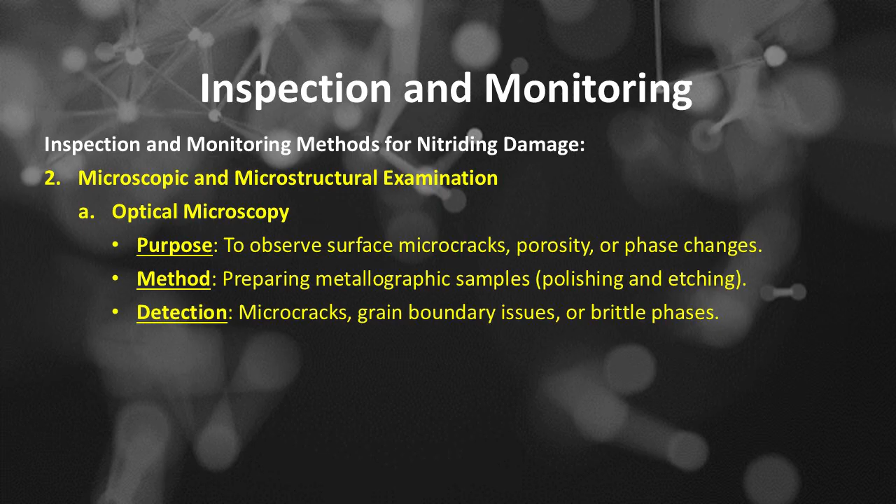B, scanning electron microscopy, or SEM: its purpose is high-resolution imaging of surface and subsurface features, used to identify microcracks, porosity, or inclusions. An additional method is energy dispersive X-ray spectroscopy, or EDS, for compositional analysis.

C, microhardness testing: its purpose is to assess hardness profiles across the nitride layer. The method involves indentations under controlled loads, with detection of variations indicating decarburization, brittle phases, or uneven case depths. Number 3 of inspection and monitoring methods for nitriding damage is non-destructive testing, or NDT, techniques.

Another NDT technique is ultrasonic testing, or UT. Its principle is that high-frequency sound waves detect internal discontinuities. Its application is to detect internal porosity, cracks, or delaminations, and to measure layer thickness and uniformity.

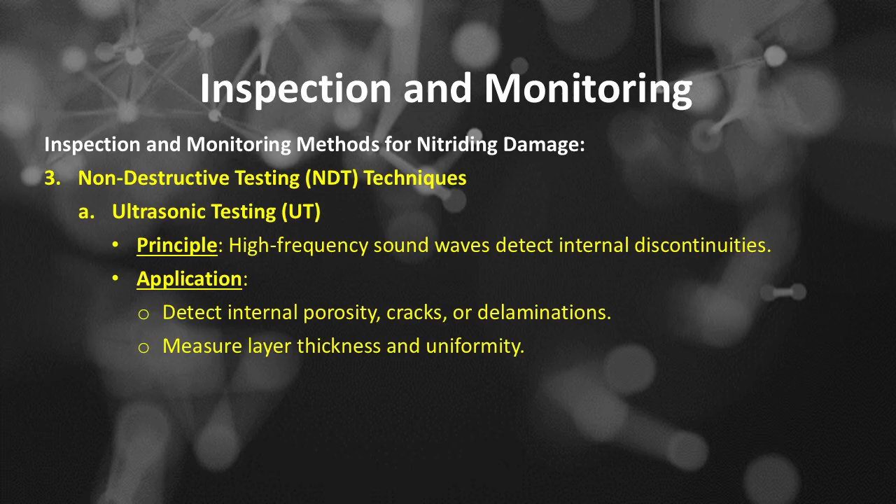The methodology of UT uses immersion or contact probes, with echo analysis to identify reflections from flaws. Its advantages are deep internal inspection and suitability for thick components. Its limitations are that it is less effective for very small or surface-breaking cracks.

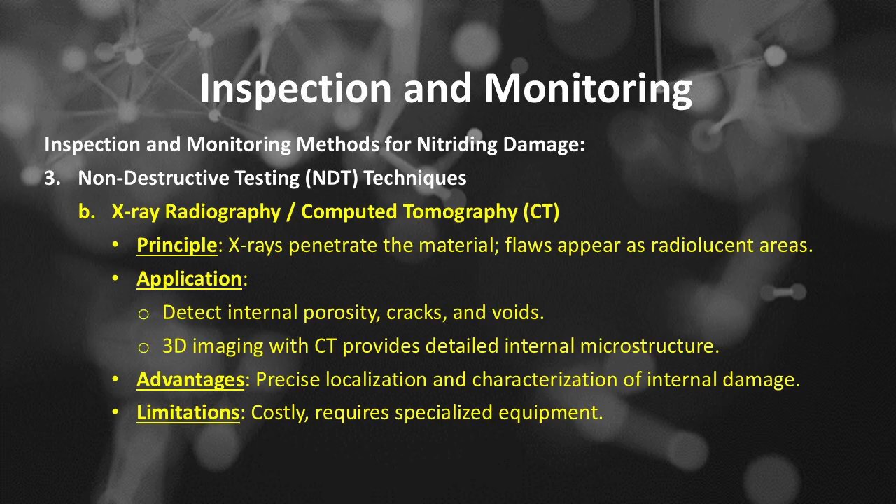The next NDT technique is X-ray radiography or computed tomography, CT. Its principle is that X-rays penetrate the material and flaws appear as radiolucent areas. Its application is to detect internal porosity, cracks, and voids, with 3D imaging via CT providing detailed internal microstructure. Its advantages are precise localization and characterization of internal damage, while its limitations are that it is costly and requires specialized equipment.

The next NDT technique is magnetic particle inspection, MPI. Its principle is to detect surface and near-surface cracks in ferromagnetic materials. The methodology involves magnetizing the component and applying ferrous magnetic particles; surface defects cause magnetic flux leakage that attracts particles. Its advantage is effectiveness for surface cracks, especially in steels, while its limitation is that it is only suitable for ferromagnetic materials.

The next NDT technique is dye penetrant testing, DPT. Its principle is that surface-breaking flaws are revealed by dye seepage. The method involves applying penetrant liquid, removing excess, and applying developer to draw out penetrant from cracks. Its advantages are detection of surface cracks, blisters, and porosity, while its limitation is that it cannot detect subsurface flaws.

Number 4 of inspection and monitoring methods for nitriding damage is residual stress measurement. A) X-ray diffraction, XRD, is used to measure residual stresses induced during nitriding, by analyzing diffraction peak shifts. High residual stresses correlate with crack initiation risk. B) Neutron diffraction is used for non-destructive residual stress measurement in thicker components.

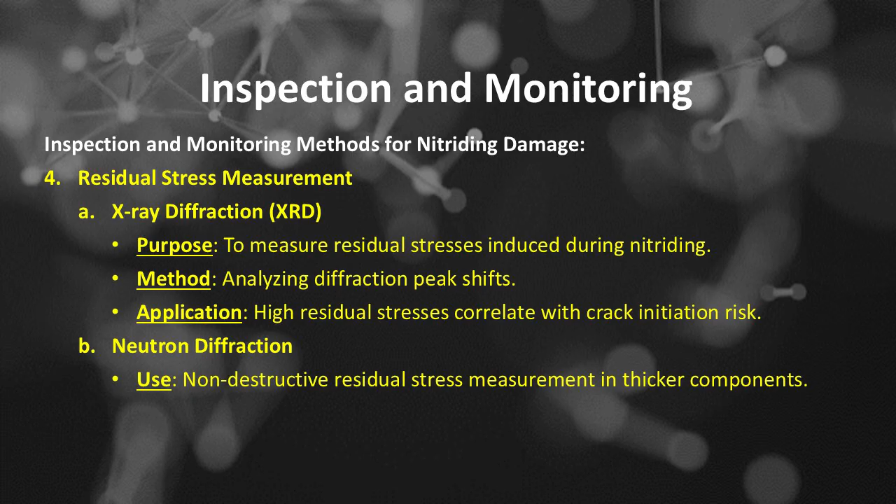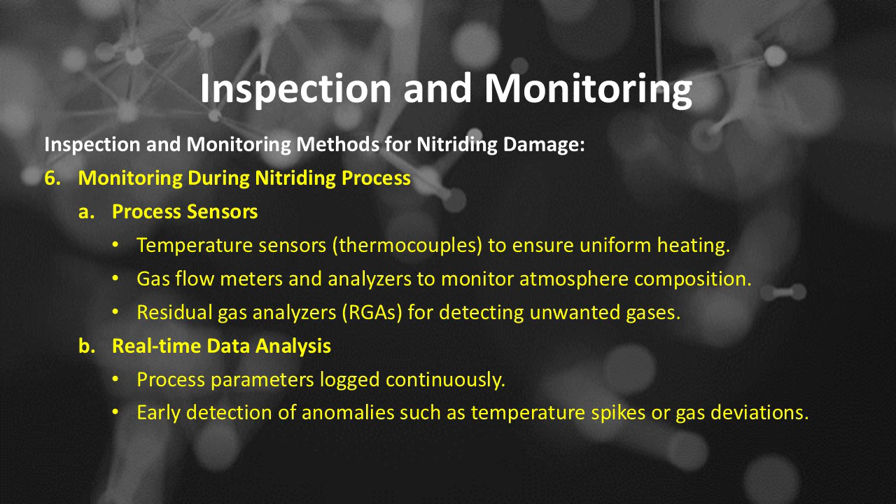Number 6 is monitoring during the nitriding process. A) Process sensors: temperature sensors and thermocouples ensure uniform heating, gas flow meters and analyzers monitor atmosphere composition, and residual gas analyzers (RGAs) detect unwanted gases. B) Real-time data analysis: process parameters are logged continuously for early detection of anomalies such as temperature spikes or gas deviations.

Summary table of inspection and monitoring techniques for nitriding damage. Visual inspection: purpose is surface defects; capabilities include detecting cracks, blistering, and discoloration; limitation is that it cannot detect subsurface flaws.

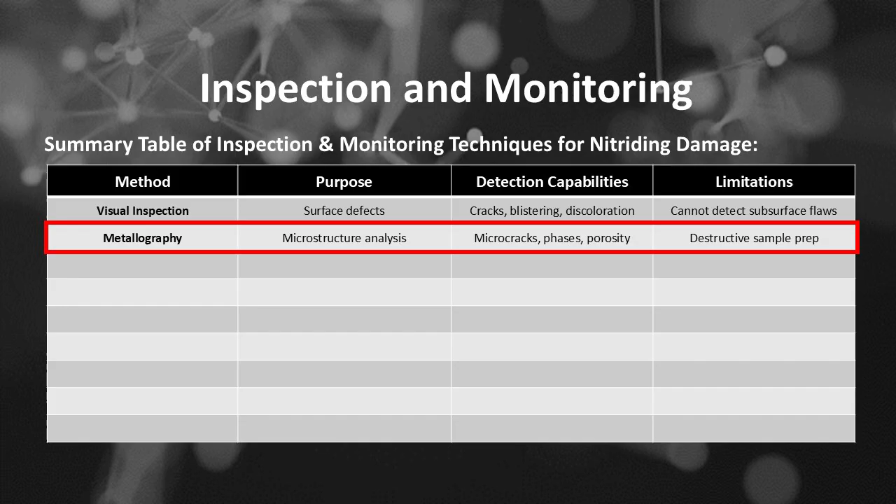Metallography: purpose is microstructure analysis; capabilities include detecting microcracks, phases, and porosity; limitation is destructive sample preparation.

Scanning electron microscopy (SEM) and microhardness: purpose is microstructure and hardness profile; capabilities include detecting microcracks and phase changes; limitations are cost and microsampling.

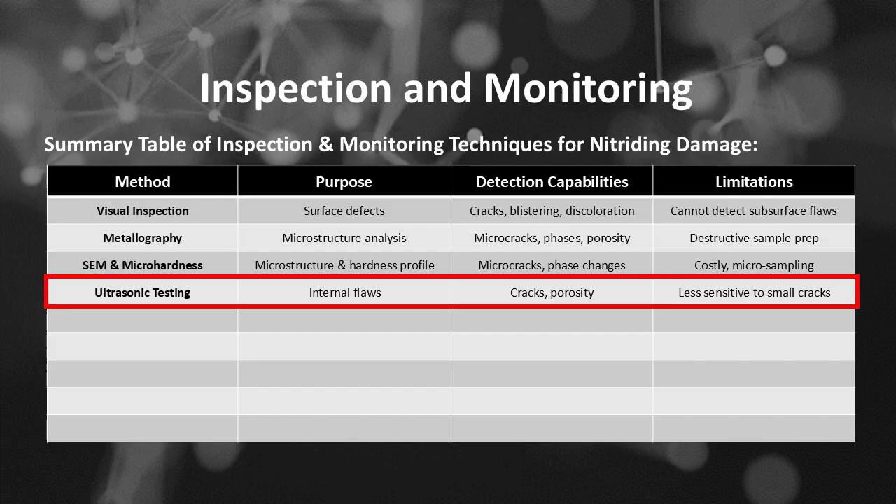Ultrasonic testing: purpose is internal flaws; capabilities include detecting cracks and porosity; limitation is less sensitivity to small cracks.

X-ray radiography or computed tomography (CT): purpose is internal defects; capabilities include detecting voids and cracks; limitations are expense and complex setup. Magnetic particle inspection: purpose is surface cracks; capabilities include detecting surface flaws;

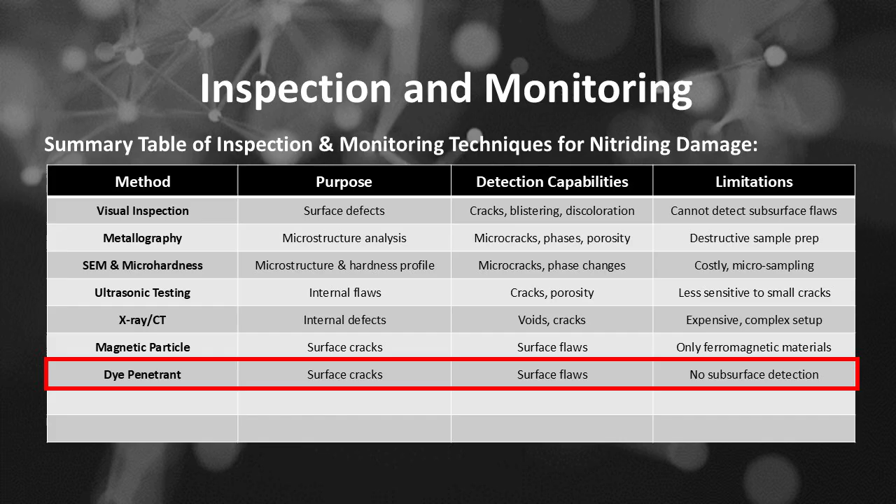limitation is applicability to only ferromagnetic materials. Dye penetrant: purpose is surface cracks; capabilities include detecting surface flaws; limitation is no subsurface detection.

A comprehensive inspection and monitoring regime combining visual, microstructural, NDT, and process parameter controls is essential for early detection of nitriding damage. Regular inspection helps maintain high quality, optimize process parameters, and prevent costly failures.